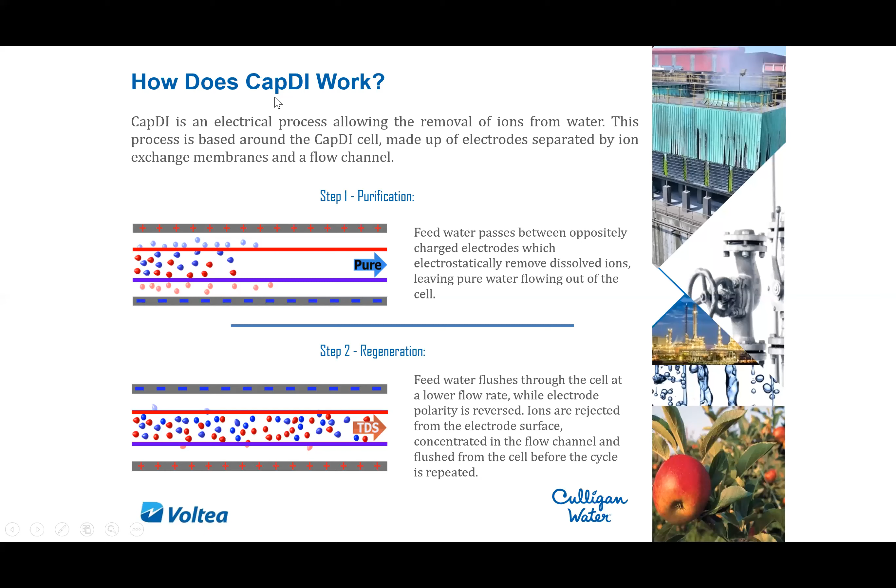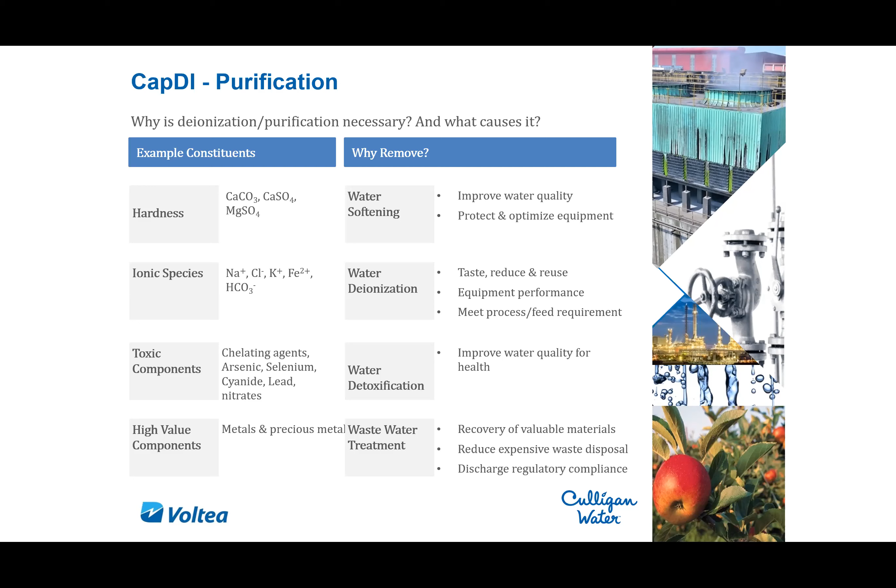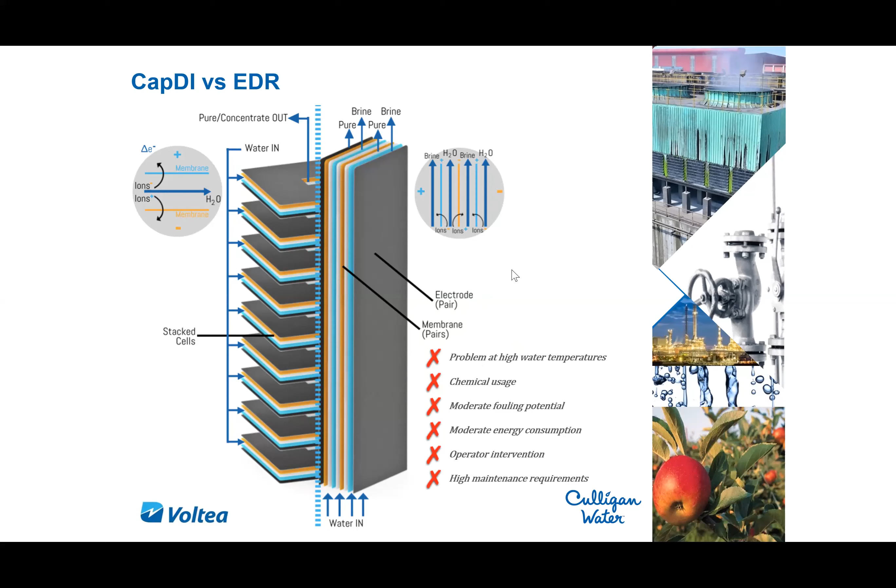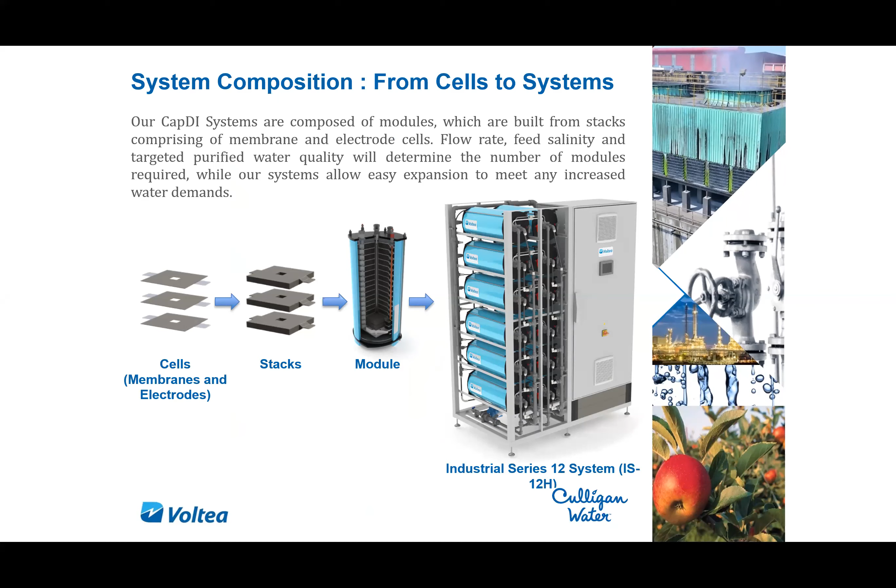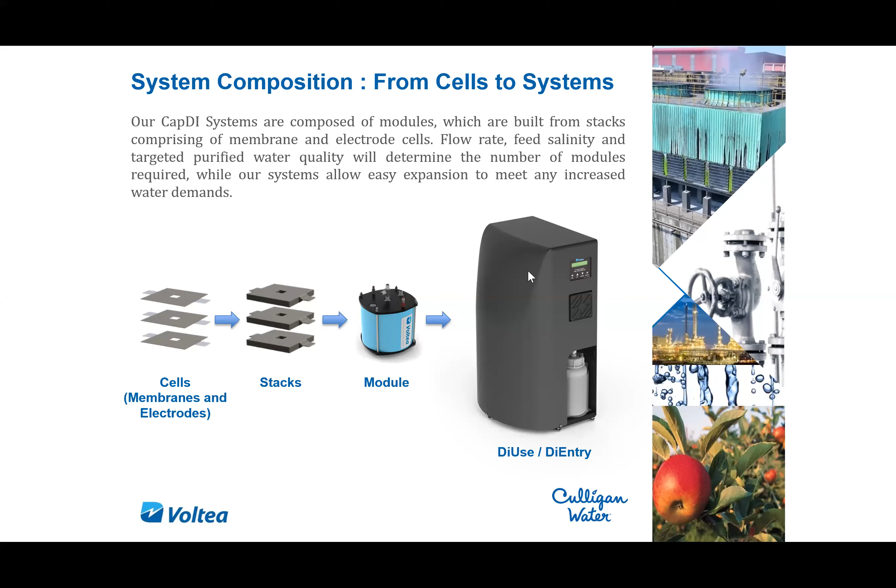This here is the smaller unit we're talking about, a DiUse or DiEntry. A simple module put into a system, controls here on the side take care of everything. This is the regenerant bottle used for the whole system. It's basically citric acid. In a commercial application, you might use a stronger acid, but it does everything automatically and takes care of itself. All you've got to do is look at the bottle and make sure it's not empty.

Voltea has over 100 global patents pertaining to their technology, how it's implemented into modules and membranes. It's a very high quality use of ion selective membranes that they actually manufacture under their own patents.

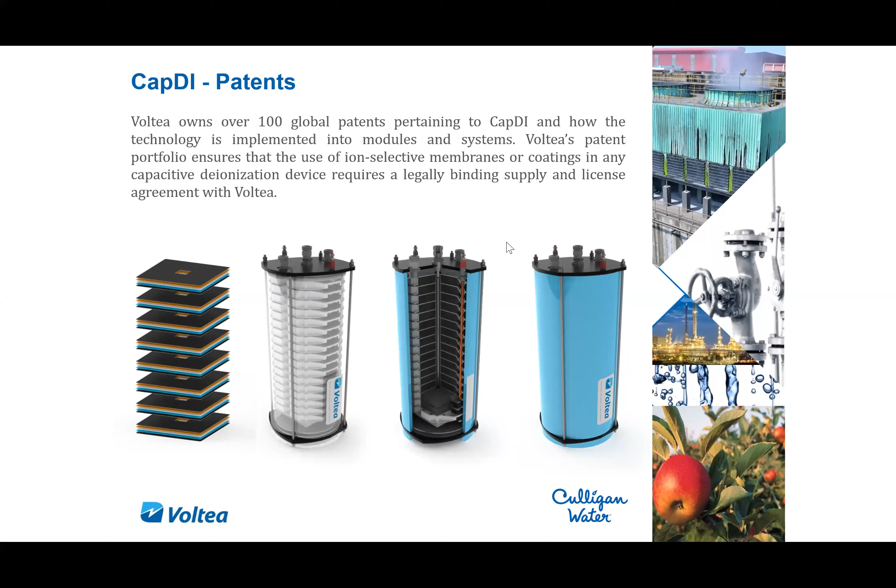Here's some of the industrial product lines, anywhere from a simple 2 system to a 6, up to even 40, but they're totally modular to fit the needs you have, and they can be built to tie together modularly to hundreds and hundreds of gallons per minute, even into containers you'll see later.

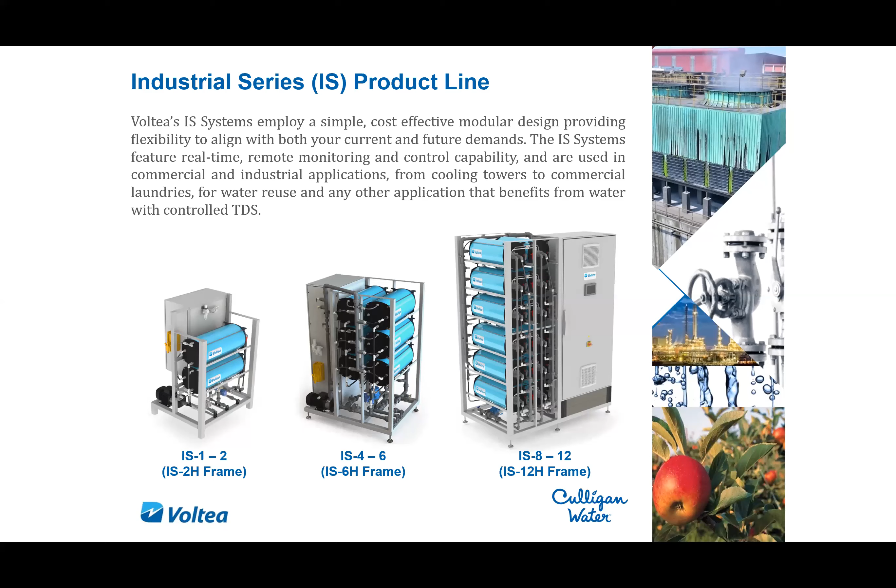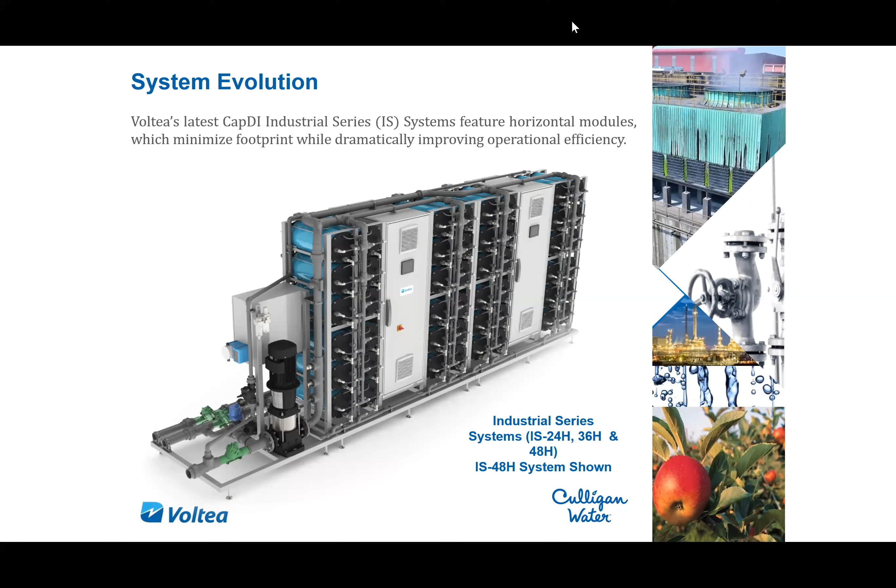Here's a large unit, similar to the one we're putting in the beverage factory. It'll do almost 50 gallons per minute, automated controls, simple racks. The racks are easily interchangeable and the cells are very easy to change - 2 bolts, a couple minutes and you've changed a cell when needed. That need is in the 5 to 7 year range, lasting as long as ion exchange resin usually does in a water softener.

Voltea has come up with exploratory development kits - basic smaller units that can be taken out for a pilot test for applications where you don't know if it'll work, and you don't want to be the first guy to jump on the bandwagon and be embarrassed if it doesn't. We have the capability of coming out to test the theory first, so you can see the results yourself before you buy a system. In most cases there's a modest charge for setup, delivery and trial, but if the purchase is made, all of that is returned towards the purchase price.

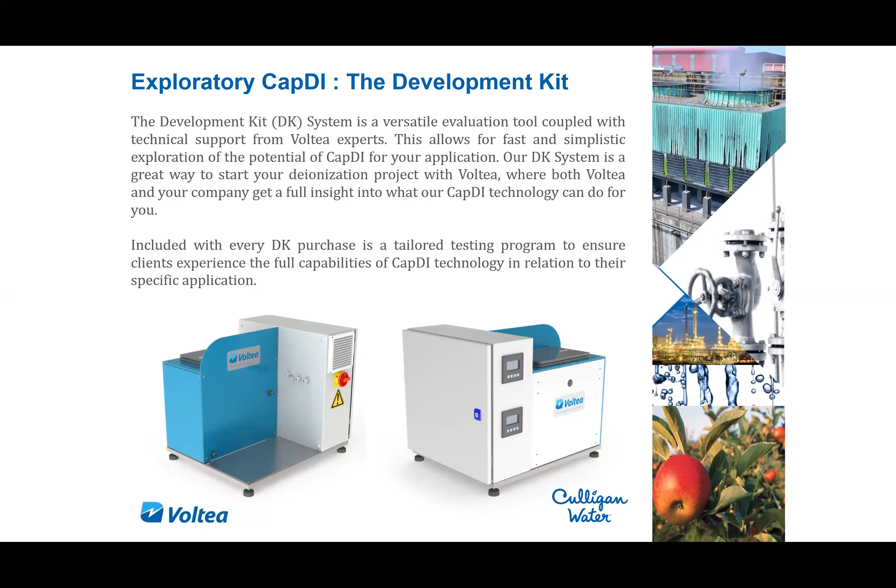As I was saying, the unit has dynamic control that can be controlled remotely, on site, or by an operator on hand. The unit is monitored live if chosen, not anything you're waiting for somebody to go read your numbers - you can read it live. You can see the quality of water coming in, the quality of water coming out, and the volume.

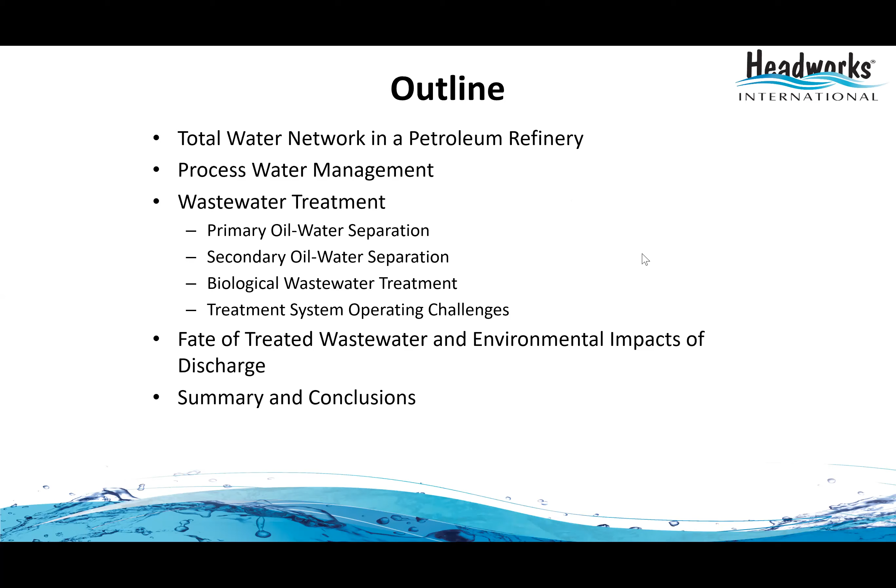First, let's talk about stormwater. Stormwater from non-process areas is not contaminated, so it can be directly discharged into the receiving body of water. Stormwater from process areas can be contaminated by hydrocarbons, so it is first discharged and collected into a detention basin, and depending upon the concentration of pollutants, if any...

Hi, Alan. Hello there. Hello. Interesting, not quite sure what happened though. Let's try again.

Okay, so depending upon the presence of contaminants, water will either be discharged or sent to the effluent treatment plant, ETP. River or seawater—in certain refineries they use seawater for cooling and condensing—and if those coolers and condensers are in process areas, there is a possibility of tube leakage and contamination by hydrocarbons. Again, depending upon the presence and concentration of contaminants, they are either sent to the ETP or discharged if determined to be clean enough.

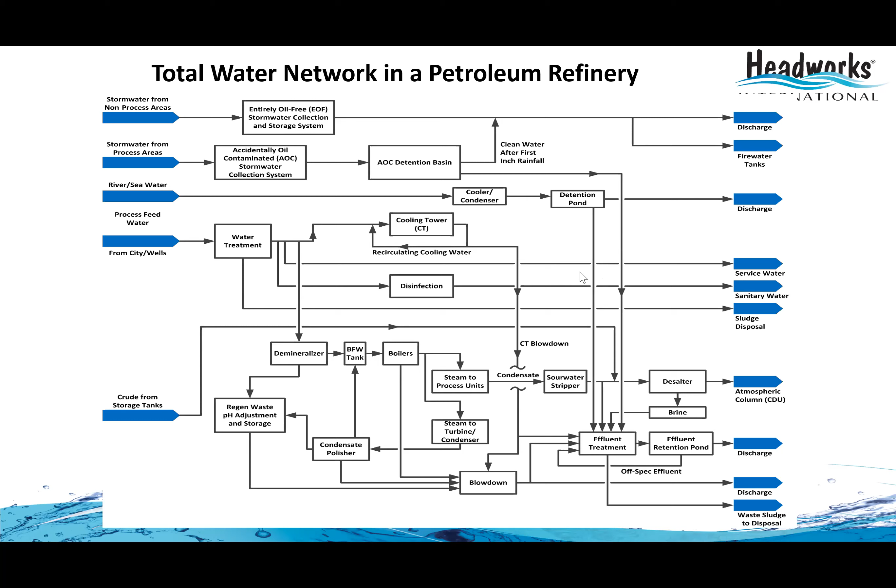Okay, so wastewater treatment, the general scheme is that, like I mentioned before, all the blowdown streams, contaminated process runoff, contaminated process waste, spent caustic, stripped sour water, desalter brine, everything is collected together and they're all laid into the treatment process.

And you can see at the bottom, this is the treatment line. Here the process starts with API separator, where the bulk of oil and solids are removed. Then it goes to an equalization tank. The purpose of the equalization tank is to absorb the shocks due to sudden surge of flow or contaminants into the wastewater stream. After that, it goes to a dissolved nitrogen flotation unit for fine removal of primarily oil and any solids.

And then it is ready for biological treatment. It goes to the biological reactors. Then after biological treatment, it goes to a storage tank, and finally through the effluent filters, it is discharged and the sludge is disposed separately.

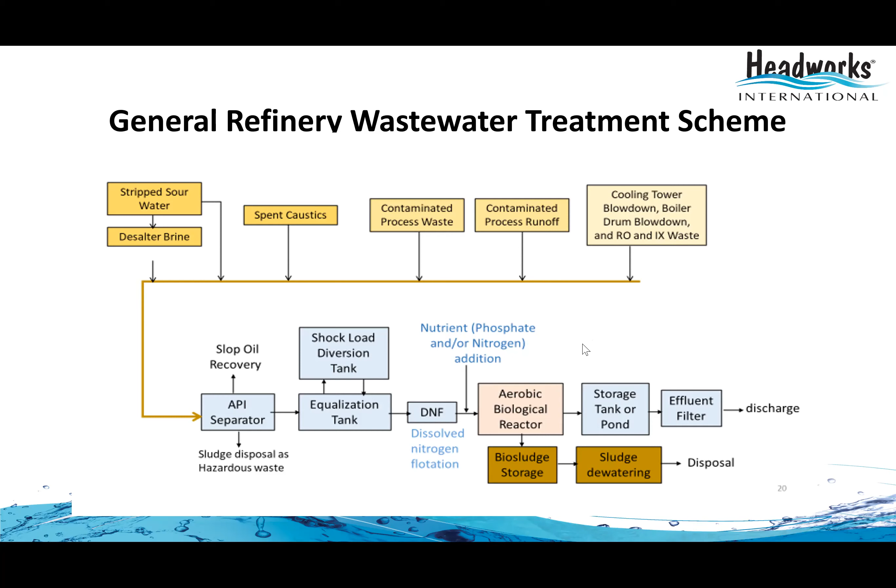Okay, primary treatment has two steps. Primary oil water separation by API separators. And here, the bulk separation takes place here. This is the very first unit operation in a wastewater treatment train refineries.

So typical effluent oil concentration is anywhere 50 to 150 ppm, whereas influent can be anywhere 1,000 or even more. And here, mainly the free phase oil is separated. Oil can exist in refinery wastewater in three forms: free phase, which can float easily; emulsified, which is difficult to separate; and dissolved phase. So mainly free phase oil is separated in API separators, and their operation and design is guided by API standard.

These days, these separators have to be covered to avoid air emissions of hydrocarbons, and because there is enclosed space, it has to be purged with an inert gas, typically nitrogen, to avoid any explosive situation.

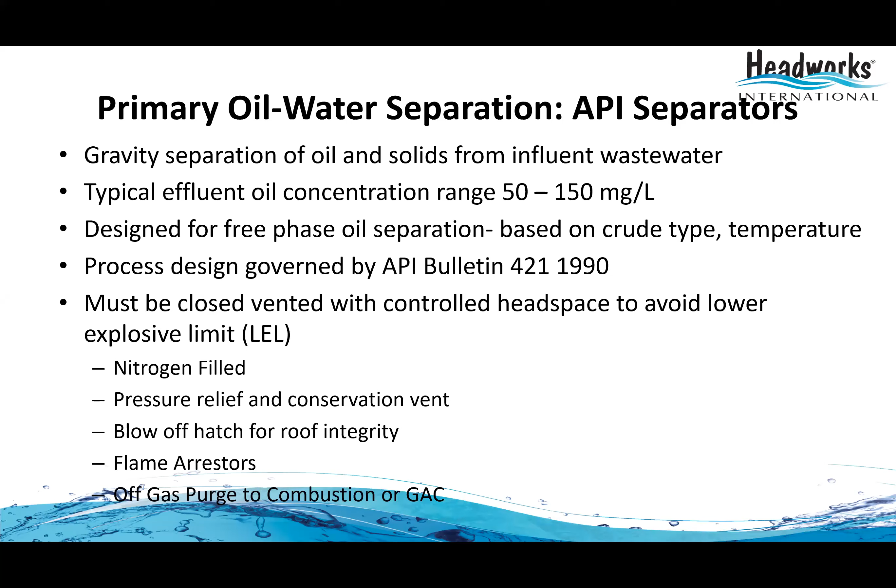Okay, we are not showing the equalization tank. That's just a vertical tank in most cases, allowing about a day of retention time. But the secondary oil water separation is by flotation, and there can be two types of flotation: induced gas flotation and dissolved nitrogen flotation. Here, dissolved nitrogen flotation takes place.

In both cases, the majority of oil that is separated is emulsified oil, which is very difficult to separate just by gravity. So here, the separation is assisted by bubbles of gas. In this case, the gas is nitrogen, and nitrogen is pressurized by water, high pressure water, and nitrogen and high pressure form a solution, and that high pressure is released at the inlet of the DNF. As the pressure is released, the gas bubbles come out in very tiny micro bubbles.

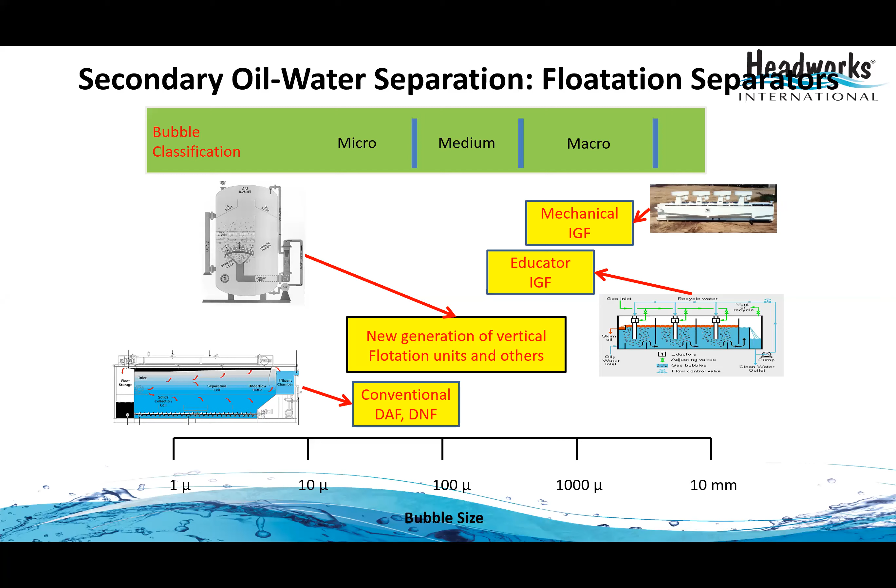Now we move on to biological treatment. The basic principle is that most contaminants are organic materials originating from oil. So organic pollutants plus oxygen plus nitrogen and phosphorus are needed because they support the growth of biomass—these are nutrients—along with some micronutrients like metals and other elements. These react together, and the oxidation reaction is catalyzed by enzymes secreted from the bacteria. As a result, the oxidation reaction produces carbon dioxide and water. Part of the organic matter forms new cells through reproduction, so there is net growth of cells plus microbial byproducts, and energy is produced. This energy is needed for the bacteria to move, for metabolic purposes, respiration, and reproduction, supplied by the oxidation of organics.

You can compare that to how we humans assimilate food. When we metabolize food, we also develop energy, we respire, and produce CO2 and H2O. In our case, new cells are deposited in our body. So it's very similar, particularly for aerobic biochemical reactions. Some cells die, so there is some decay, and that decay comes out as sludge.

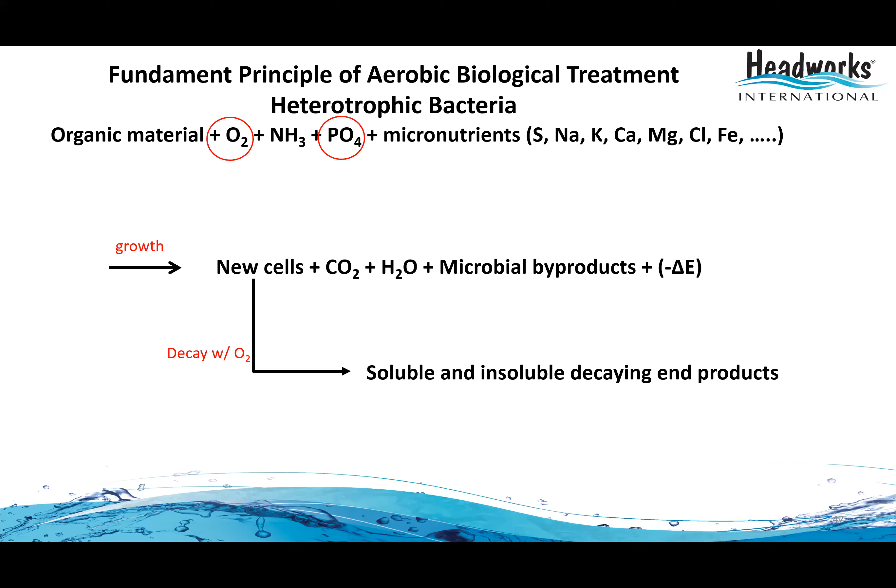I'll quote Dr. Van Loosdrecht of Technical University of Delft, considered one of the gurus in this field. According to him, for BOD removal—BOD being the organic matter associated with oil or organics—it is the stoichiometry that controls the reaction. In case of nitrification, which I haven't delved into much, there are locations where regulators require removal of ammonia by nitrification, oxidizing ammonia to nitrate ions. For those, it is the kinetics that controls, requiring a long retention time in the bioreactors.

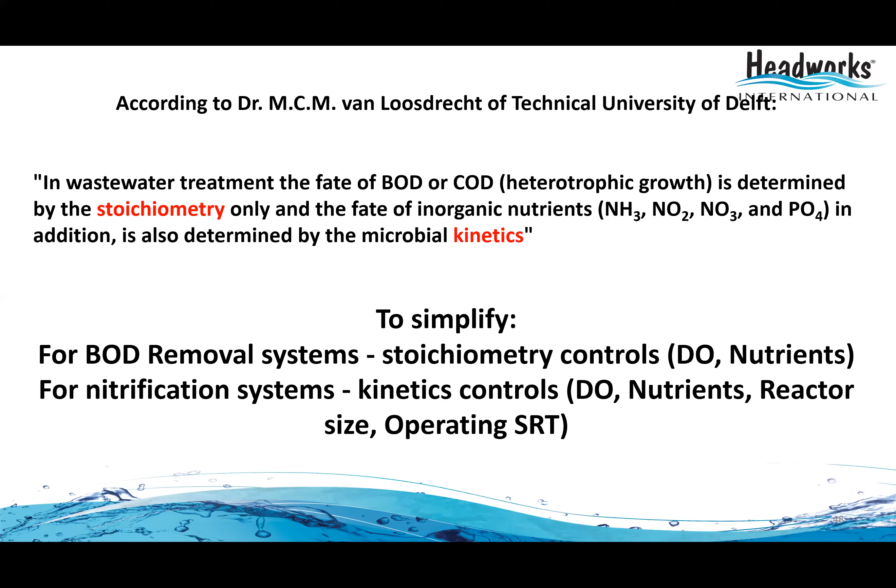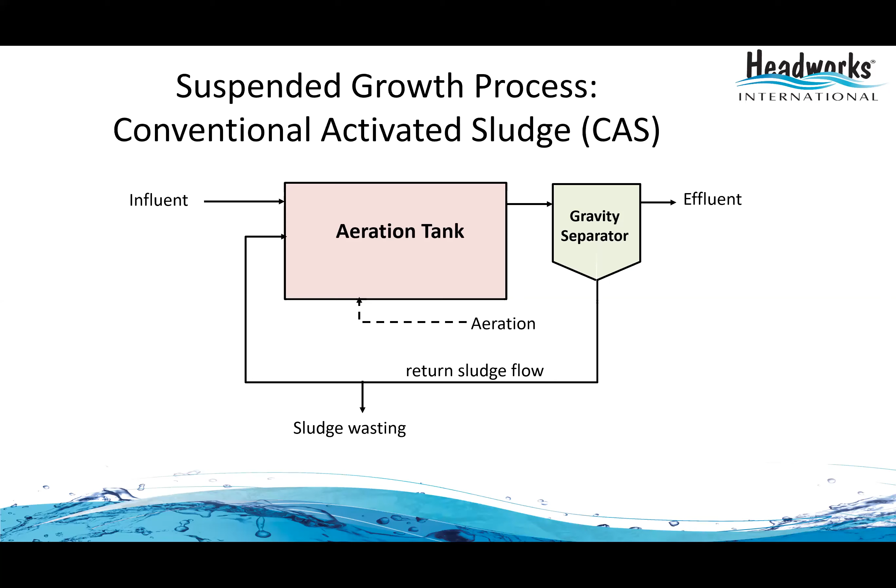This is a broad overview of the conventional activated sludge process. The influent comes in to the aeration tank, which is the bioreactor where air is supplied to provide oxygen. Air is necessary to keep the whole tank well mixed, uniformly mixed, and to supply oxygen for respiration and metabolic processes of the bacteria. What comes out is a solid-liquid suspension; the biomass separates by gravity, settles at the bottom, and clarified water comes out as effluent. Part of the solids is wasted because solids grow in number due to growth in biomass—there is reproduction in the system—so net growth is wasted to keep the biomass concentration in the aeration tank fixed for steady state operation. The remaining solids are sent back as seed for the incoming influent organic matter to be oxidized.

That was the traditional process. There have been new innovations in the past 2 to 3 decades, no longer truly new since there's widespread application of these processes now. What are the drivers for new processes? First, increasing need to recycle and reuse treated wastewater globally, since water is a precious and dwindling resource. Second, the need to treat increasing volumes of wastewater resulting from increased throughput of crude in refineries. Third, tighter regulations requiring nutrient control—just BOD removal isn't enough; you also have to remove nitrogen and phosphorus that may come with refinery wastewater. I'm listing three processes: membrane bioreactors, moving bed bioreactors, and integrated fixed film activated sludge reactors.

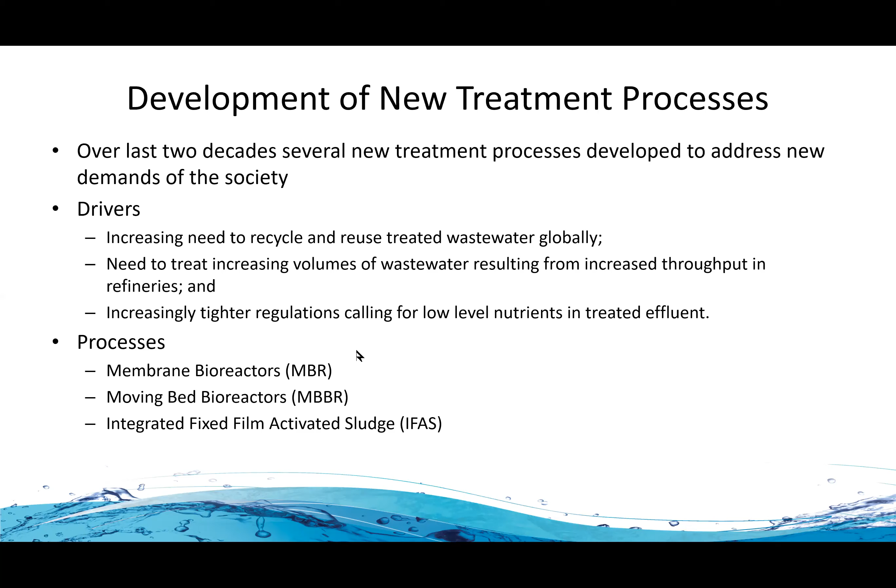And with the price of land and real estate, many refineries and utilities don't have any space to expand and accommodate higher capacity. So in that case, this is a very good option.

And the best advantage is that the solid liquid slurry that comes out is separated by an ultrafiltration membrane. It's not gravity separation. So the quality of effluent is very high, the BOD and TSS is less than 2, and that can be directly used for cooling tower, or it can be sent to an RO unit for boiler feed water. And then the net growth is wasted, and the rest of the sludge is returned as return activated sludge to the bioreactor.

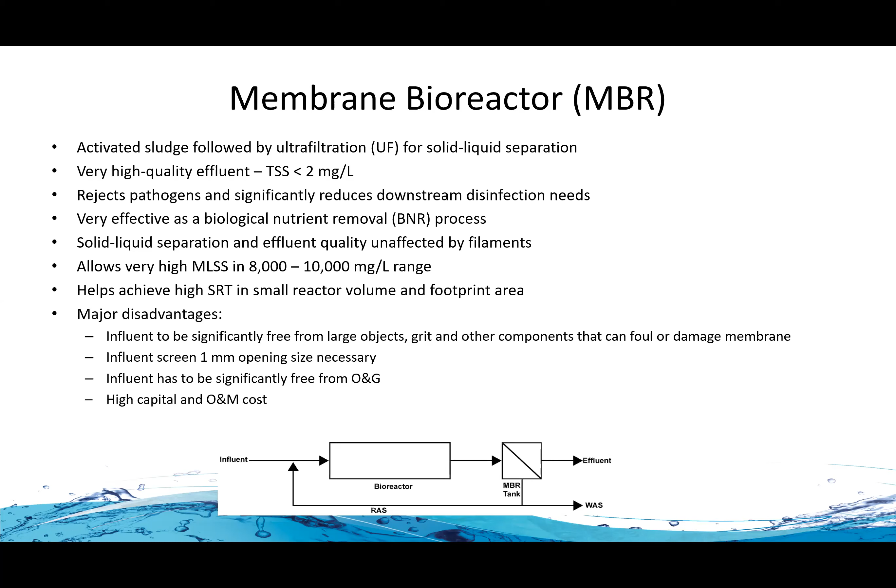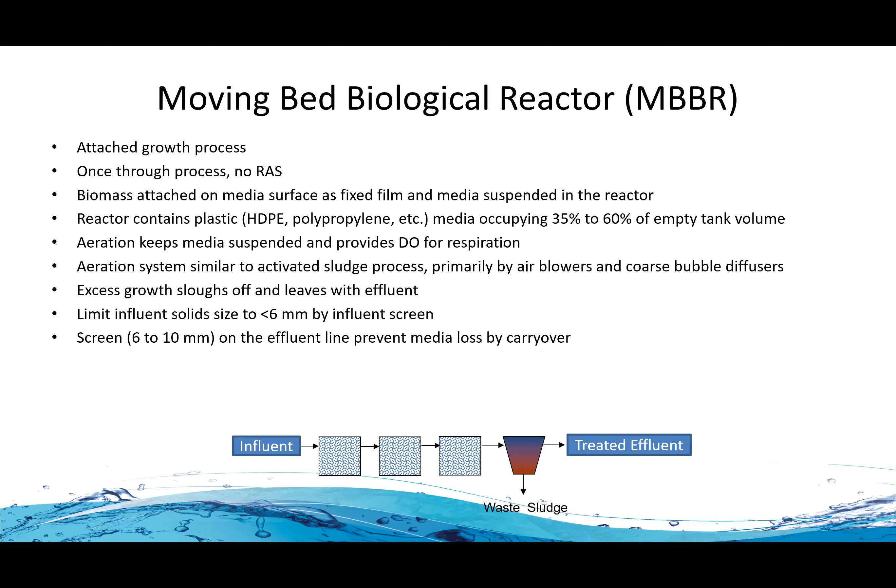And it's almost a hands-free process because there is no recycle. So whatever sludge is produced is wasted. It requires minimal oversight by operating personnel. It can even be operated remotely. So those are the main advantages. Can we move on, please?

Disadvantage is the settling property is not as good as activated sludge process. So you have to use a DAF for solid liquid separation rather than a gravity separator. Next slide, please.

Okay, here IFAS, integrated fixed film activated sludge process. Here, the main difference with MBBR is that the sludge is returned. So this can use a gravity clarifier, the sludge is returned, and this is a hybrid, meaning because the sludge is returned, there is attached growth as well as suspended growth. As a result of that, this takes advantage of both the suspended growth process and attached growth process.

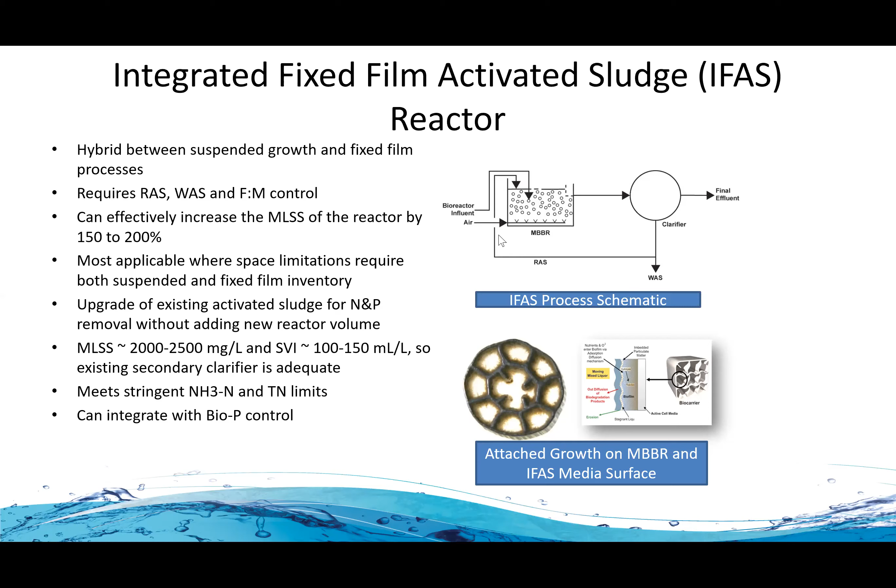So now I am going to get into some operating challenges. There are a couple of slides on that. So in two areas, there can be operating challenges: in the primary treatment area, where oil and solids removal systems include API separators and DGF, DNF.

Now, these days, they all have to be covered, and that makes it very difficult for operation and maintenance. You cannot see from outside unless you open some hatch or something. And also there is a lot of solids, particularly in the API separators. They collect a lot of solids at the bottom, to the extent that the bottom sludge scraper sometimes gets jammed and the motors burn out. That's not very uncommon. That is one of the operating challenges.

And then also sludge accumulation in equalization tanks reduces the active volume and the retention time. So the equalization function is compromised there due to solids accumulation. All of these can affect the biological treatment, because the better the oil separation and solid separation is in the front end, the easier it is for the biological treatment to function smoothly.

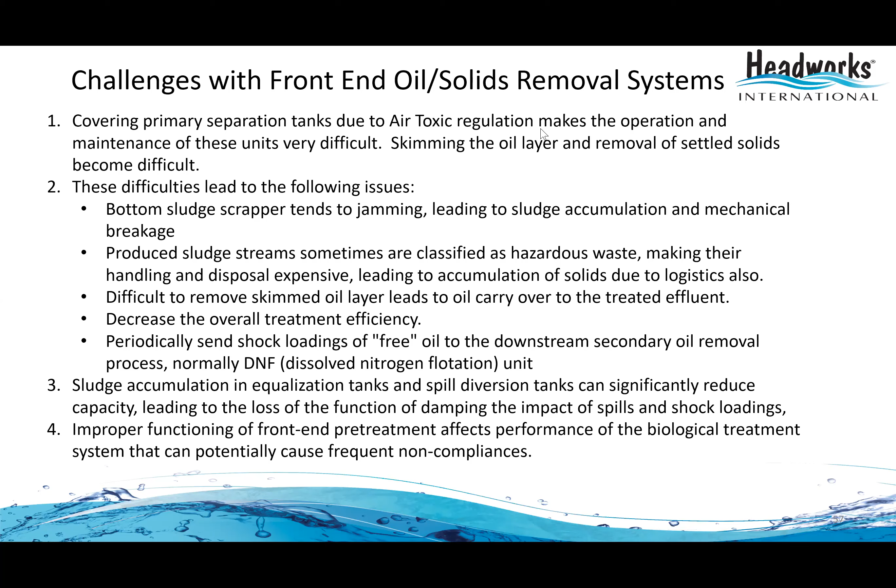Okay, with the biological treatment, if there is spillage due to excessive carryover of oil and grease, as I mentioned, the performance fails, and also it leads to foaming. In extreme cases, foaming can lead to spillover from the reactor tanks. So that is something that needs to be arrested in the primary treatment. The oil separation and removal should be very efficient.

Then these days, because of the increased use of oil from the hydrofracturing operations, those oils typically contain high H2S, and to restrict the emissions of H2S, the producers add a lot of amines, and those amines show up with the crude, and they upset the biological treatment, because amines contain a lot of nitrogenous compounds, and they demand a lot of dissolved oxygen, whereas the design may not have that much oxygen capacity. So the biological treatment fails at some point. That is something that needs to be taken care of.

Another thing is the dissolved oxygen can be maldistributed in sludge, flocks, and films. So that's a diffusion limitation.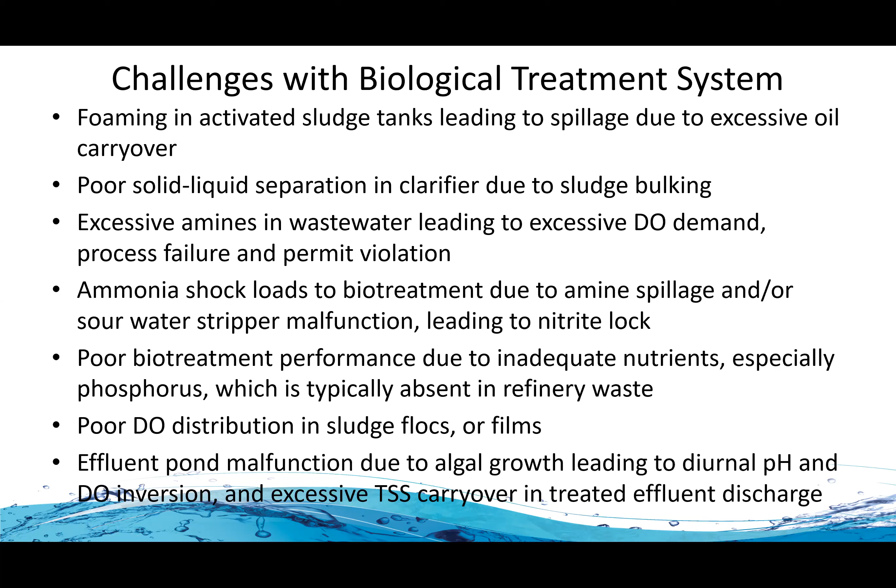In many cases, the effluent is collected in a pond, and these ponds are very much prone to algal growth, and algal growth can cause diurnal changes in dissolved oxygen and carbon dioxide. So there can be diurnal changes in pH and dissolved oxygen, which can also lead to excessive carryover in treated effluent with the discharge.

So the agenda is going to be introduction, desalination, seawater reverse osmosis, energy consumption, renewable energy, and conclusions.

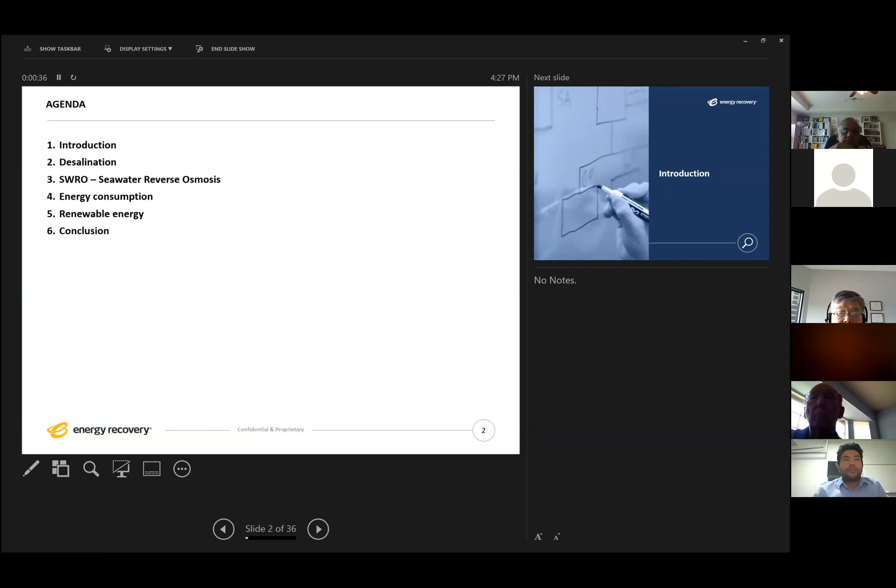So why do we need desalination or seawater desalination? This is an overall water risk map from 2020. You can see that anything with soft yellow is an area with plenty water, and anything dark red needs more water sources. As you can see in the specific case of Texas, you have a bunch of red spots as Texas needs more water. Mexico, Peru, Chile, all Africa, Middle East, South Asia, Australia, more or less, we need more sources of water. Seawater desalination is an option to increase water availability, increase other sources of water.

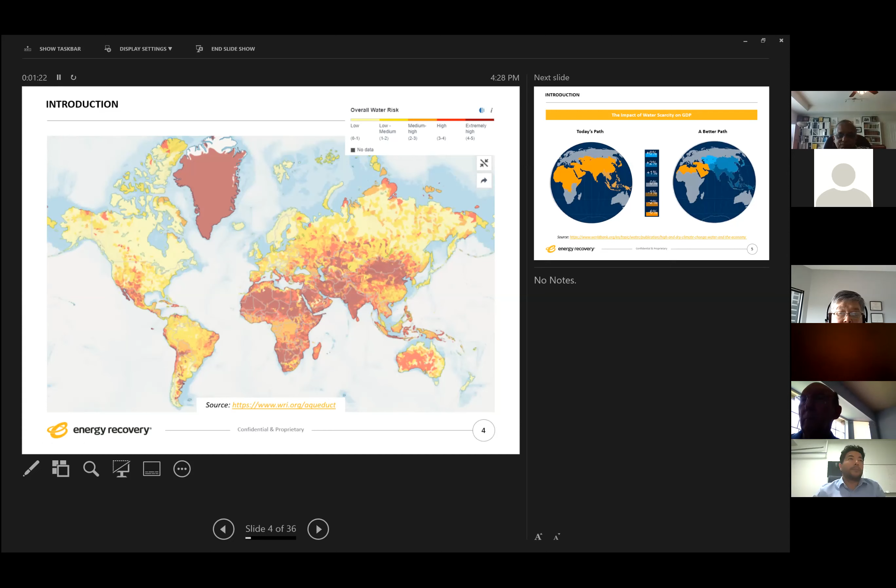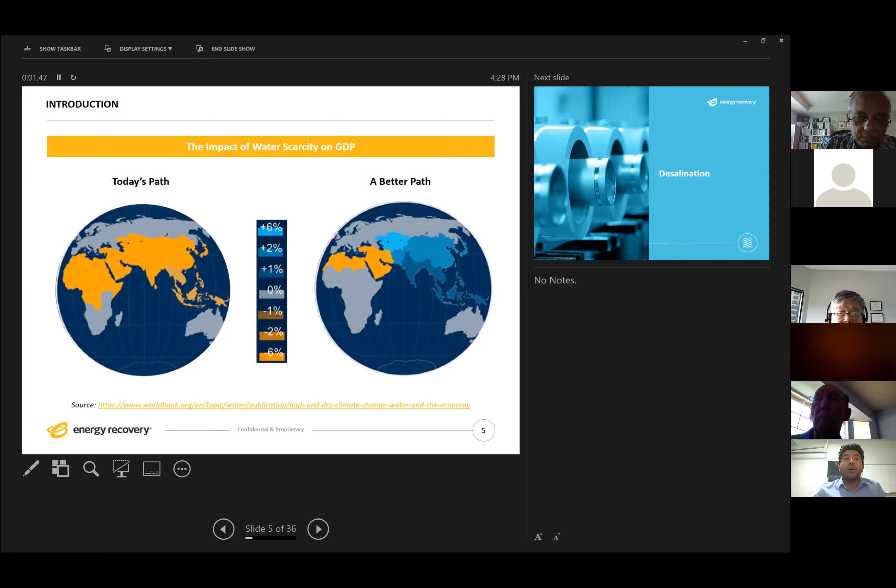It's not only about water quantity, it's also about quality of water. Per the World Bank, if you have a low amount of water, that potentially can lower your GDP by 6%. However, if you have plenty water, that will help you increase your GDP plus 6%. So water is not just about what we drink or use in the house, it's also about how it's going to affect the economy of the country.

So now let's get into the topic of desalination. Desalination is a process to remove salt from water. You can remove salt from brackish water, from a lake, from a river, from different sources. For this specific presentation, I'm going to be focusing on seawater. So let's start talking about desalination in seawater.

In 1970, we had the first technology called thermal technology, which is basically a multi-stage flash technology that evaporates and condensates the water to produce water without salt. In 1982, we start playing with membrane technologies. In 2002, we get several improvements in membrane technologies with better membranes, higher efficiency pumps, energy recovery devices, and other changes. By 2005, that will be one of the milestones where we connect desalination with renewable energies.

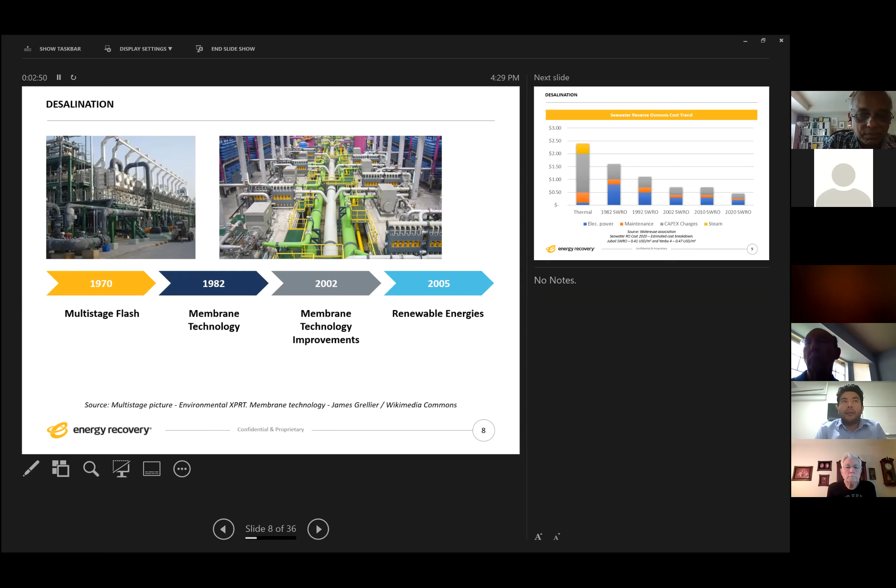But let's talk about the cost. What is the cost of the water? The first line, the thermal one, is numbered from 1970. You can see that on average, for every cubic meter of water, the cost was $2.4. Then in 1982, we started using membrane technology, so the price of water went down from 2.4 to 1.6. Something really important: if you break these costs down between electric power, maintenance, CapEx charge, and steam, you can see when we move to membrane technology, electric power becomes one of the biggest costs of the water.

Then in 1992, we keep going down from 1.6 to 1.1. In 2002, we start using high efficiency energy recovery devices and high efficiency pumps, and we drop it from 1.1 to 0.7. Finally, in 2020, we have been able to achieve prices of $0.41 per cubic meter and $0.47 per cubic meter. So you can see that with time, technology is getting better, prices are getting better, and the cost of desalinated water is getting better.

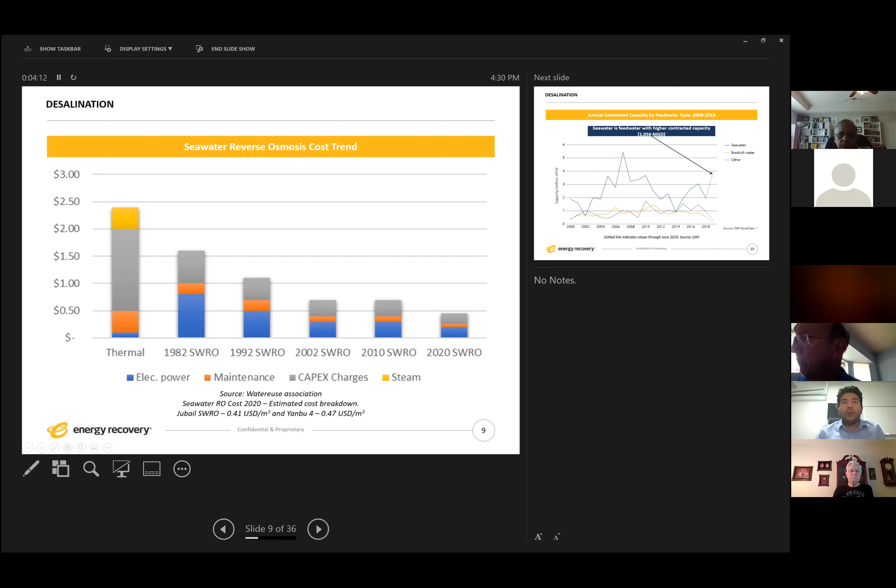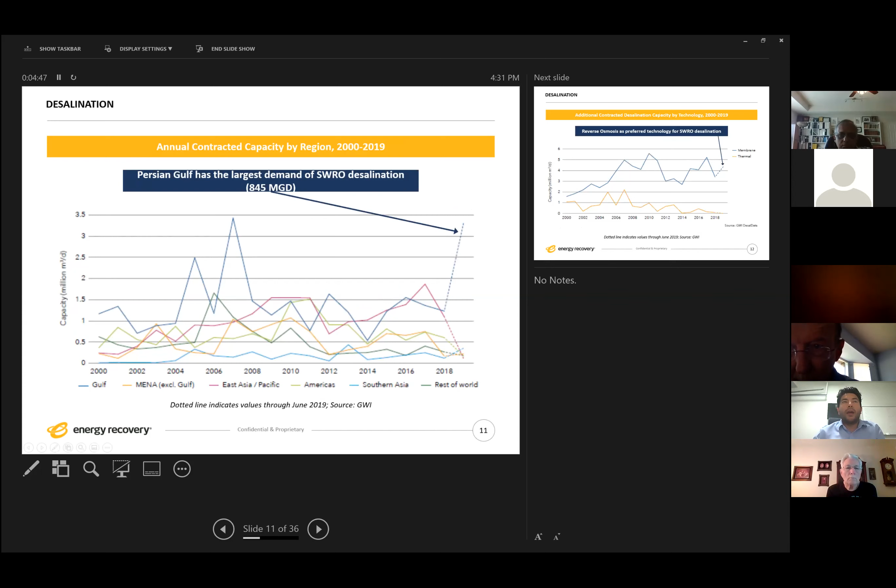So how much is the desalination market growing? You can see per this table from GWI, in June of 2019, there were 1,056 MGD of seawater desalination plants installed in the world, only in this year, by June. So we're waiting for more plants by end of 2019. If you look at this graph showing the territories - Gulf, MENA, East Asia, Americas - the Persian Gulf is the territory with higher demand for seawater RO process.

Finally, between the two technologies, membrane and thermal, you can see that membrane technology, due to the lower cost to produce water, has been the preferred technology in the industry over the last 10 years.

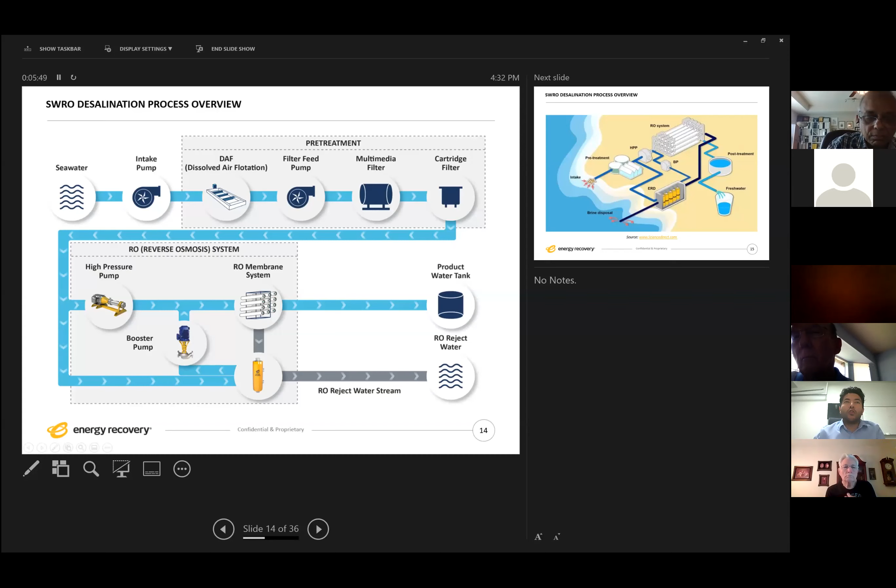So now let's talk a little more about what a seawater reverse osmosis plant is. A seawater reverse osmosis plant follows this path: you have seawater, then you get the intake pump, then you have a pretreatment. The pretreatment is based on water quality. In this case, we have a DAF, filter feed pump, multimedia filter, and cartridge filters. Then the water complies with specific requirements and goes to a reverse osmosis system. This reverse osmosis system is what we're going to be focusing on in this presentation, basically the energy recovery devices. From the RO, we get product water tank, and then we get reject water. So let's see the following video that will explain in detail how that RO plant works.

This plant is located in Spain, Barcelona. The Llobregat desalination plant is located in the municipality of El Prat de Llobregat, next to the mouth of the river.

We're not seeing it, Miguel. Sorry? We're not seeing it, Miguel. Oh, you didn't see the video? No, you'll need to select it in the share screen when you're going to share screen and select it specifically. Okay, let me do that really quick, sorry.

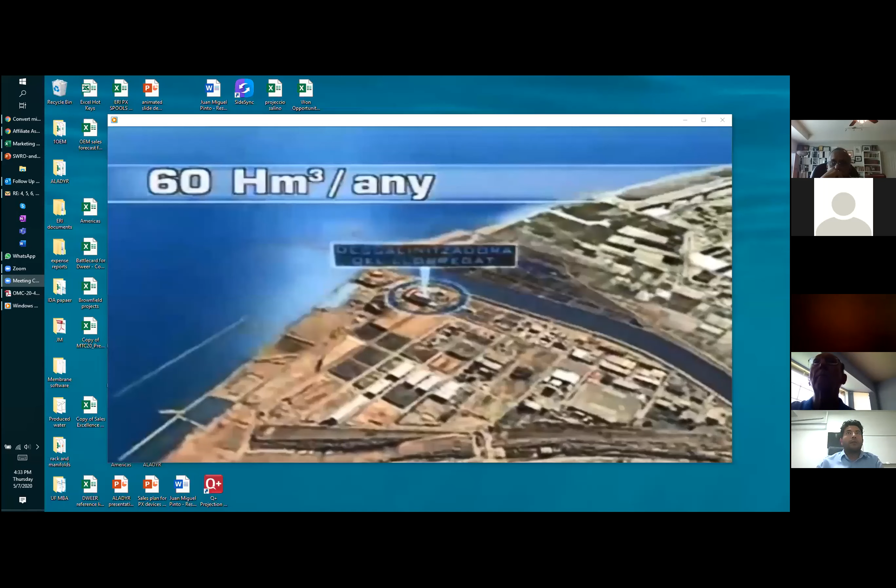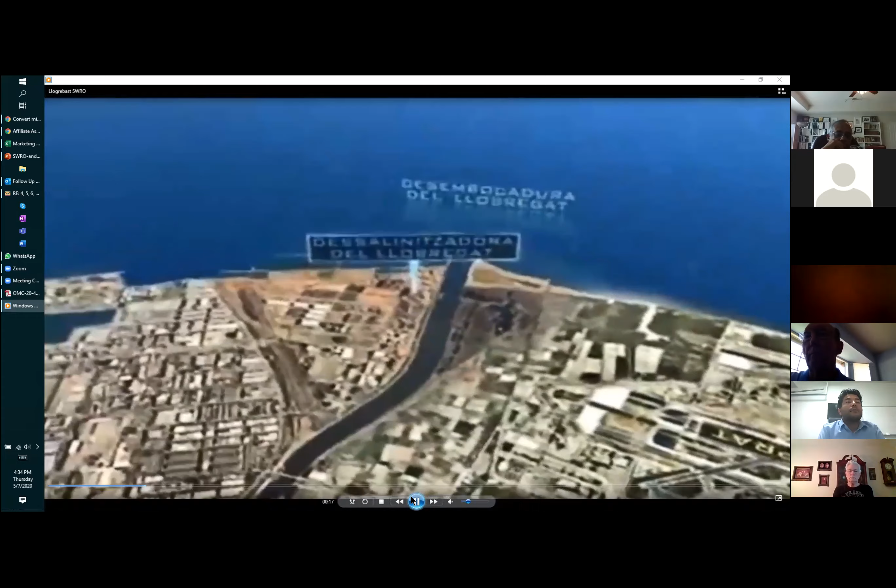As told you before, this plant is located in Spain, Barcelona. It's one of the largest seawater RO plants in Spain. The Llobregat desalination plant is located in the municipality of El Prat de Llobregat, next to the mouth of the river. It can produce 60 cubic hectometers a year, in other words, 200 million liters a day.

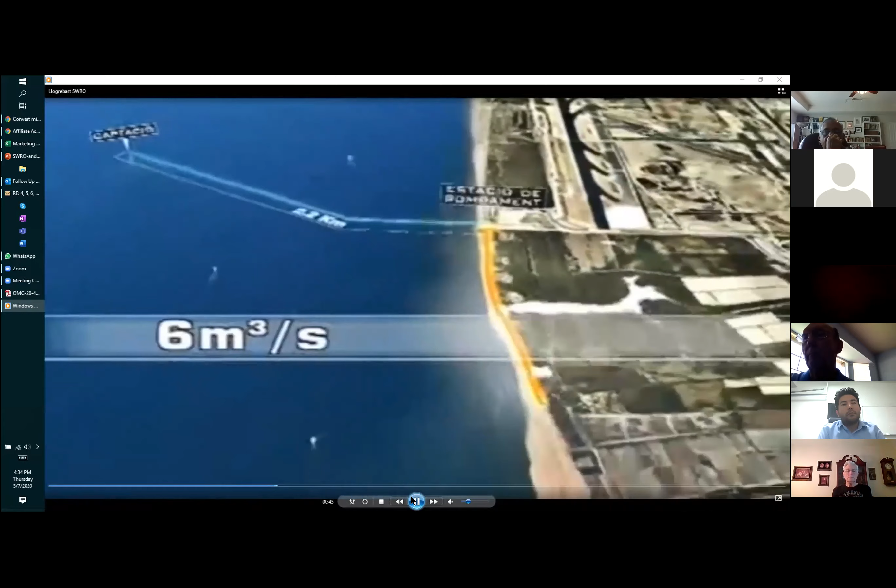The desalination process begins by collecting seawater through a 30-meter deep open intake tower and a 2.2-kilometer long underwater pipeline. A pumping station will send up to 6 cubic meters a second to the plant through a conduit that will cross the river Llobregat beneath its bed.

Here, the water will undergo a pre-treatment, consisting mainly of separating the solid matter through flotation, open filtration through sand, closed pressure filtration, and microfiltration.

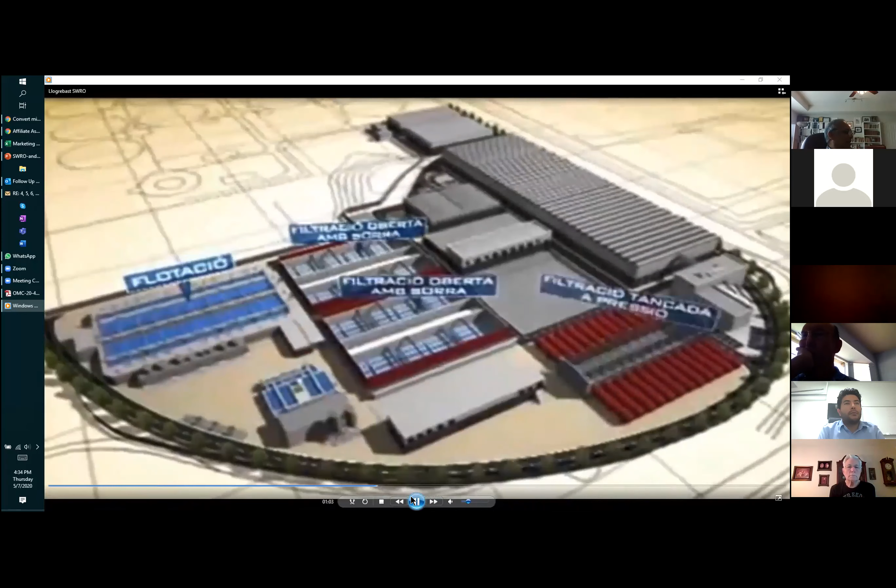The reverse osmosis process consists of passing this already filtered water through semi-permeable membranes that stop the mineral salts going through.

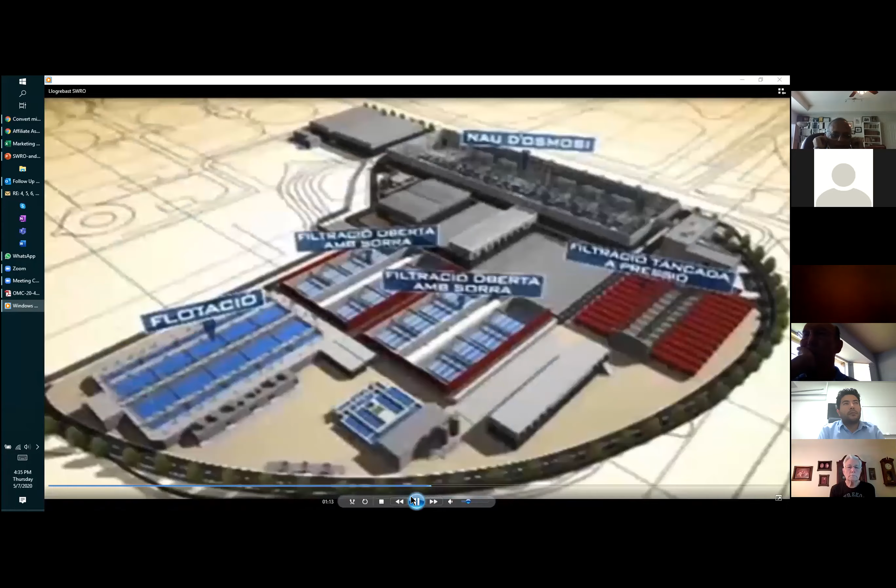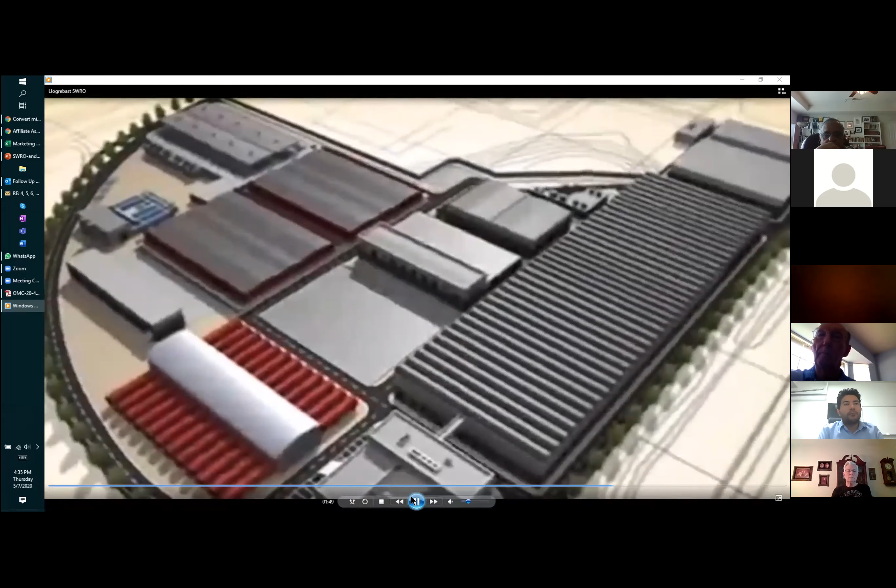High-pressure pumps are used to force the water through the membranes. 45 liters of fresh water can be obtained from every 100 liters of seawater subjected to osmosis. The remaining 55 liters of reject water have an excessive salt content. This reject water is still at high pressure, which is taken advantage of by using energy recoverers to reduce energy consumption by 50%.

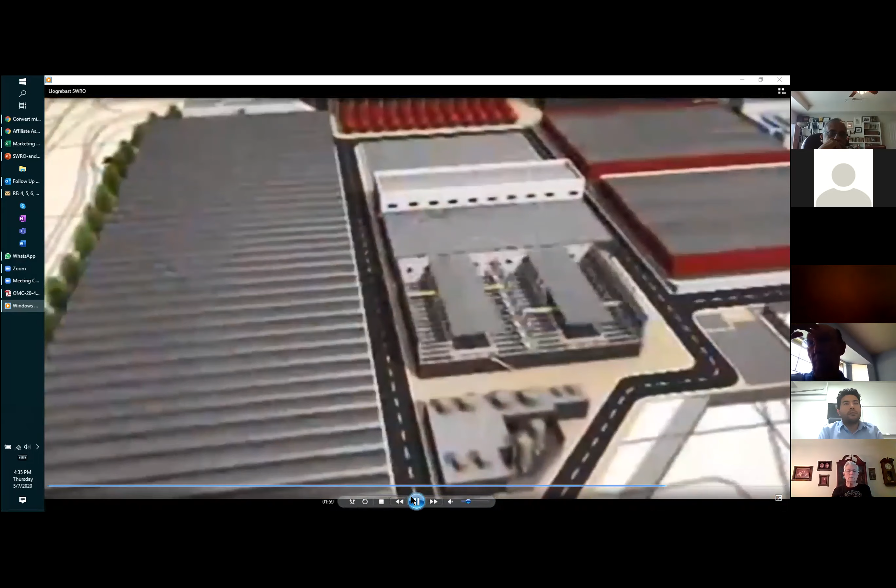The fresh water obtained from the osmosis process is remineralized to make it fit for human consumption. Finally, the water is chlorinated to guarantee its disinfection and then pumped through an 11.5-kilometer long pipeline to the Font Santa reservoirs in Sant Joan Despí.

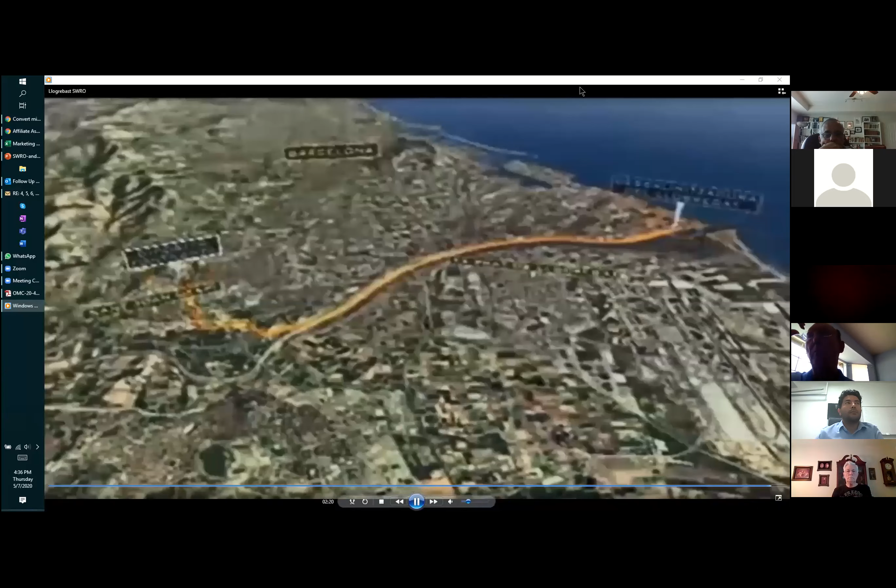Let me go back with the presentation. Very good.

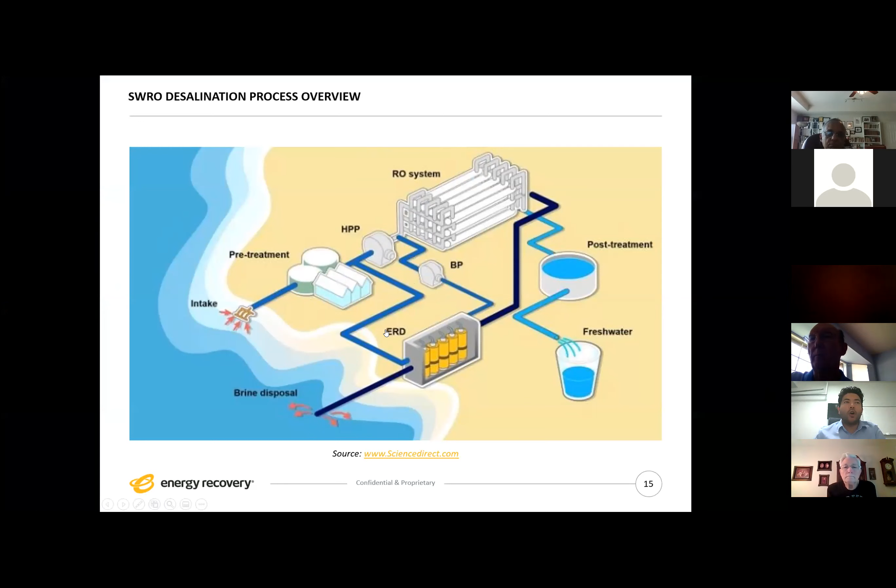So as you were able to see on the video, basically we have an intake system, pre-treatment, where we have the RO system, and then we have a post-treatment, freshwater and brine disposal. So this is the main body of a seawater RO plant. We're going to be focusing this presentation on the energy recovery device process.

And they started using, for the first time, energy recovery devices called the Francis turbine. The Francis turbine was able to keep reducing the energy consumption from 13 to more or less 7, 8 kilowatts per cubic meter. Then we got the Pelton turbine, another ERD with higher efficiency, and we kept reducing the energy consumption, getting close to maybe 4 kilowatts per cubic meter.

And finally we have the isobaric device, which is the one that my company makes, that gets the highest efficiency. We were able to drop it maybe close to 2 to 3 kilowatts per cubic meter.

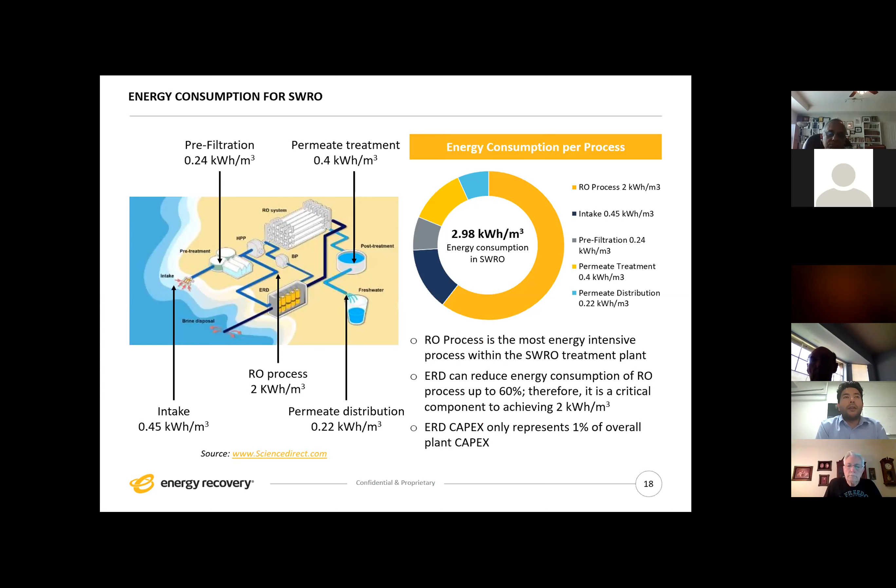So for this system, it's a system where we don't have an energy recovery device. The high pressure pump is going to take all the feed water and boost it to 920 PSI. You get fresh water, but at the same time you get concentrate. This concentrate comes out at 900 PSI, 300 gallons per minute.

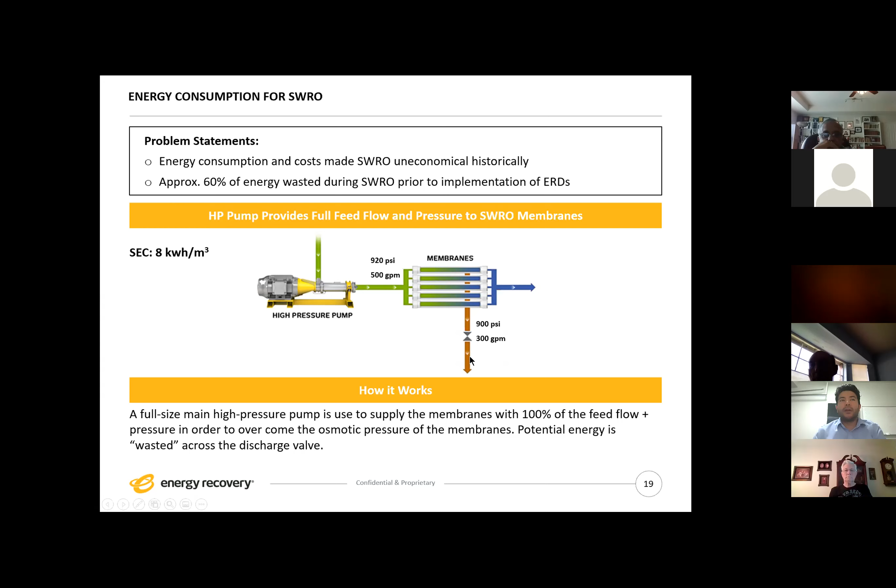What happened in this case, back in 1983, 1985, is we did not have any technology to use this pressure. So we used to have a valve, and the valve was dropping the energy from 900 PSI to 20 PSI, and then we sent the water back to the ocean.

So one of the first turbines was the Pelton wheel. The Pelton wheel was able to reduce the specific energy consumption by 4 kilowatt-hours per cubic meter. In this case, we're taking the energy of the concentrate, 900 PSI and 300 gallons per minute, and transferring it to the motor by a shaft.

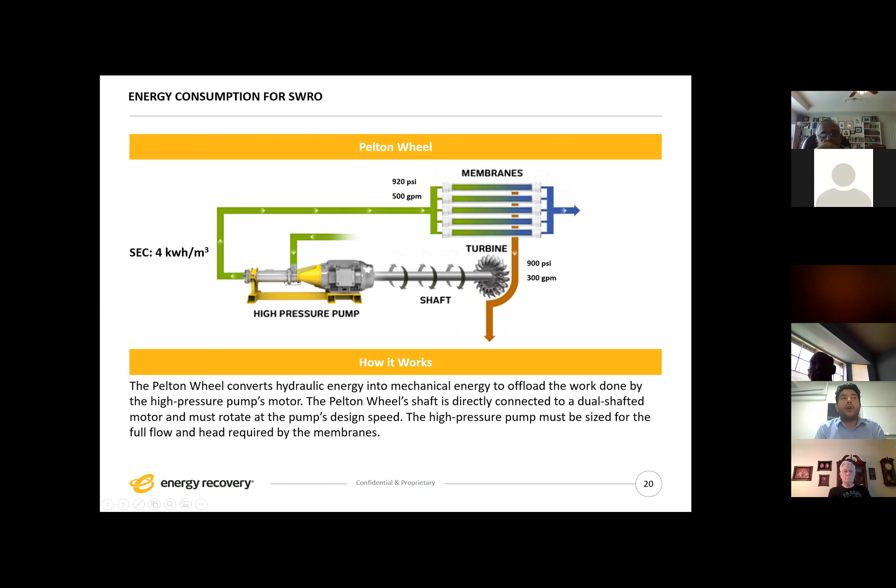The motor plus the turbine is going to boost the pressure of the feed water from 30 PSIs to 920 PSIs. So this kind of centrifugal device keeps improving with new technologies.

The next level of the Pelton turbine was the turbocharger, which we can call a booster pump without a motor. The turbocharger takes the energy of the concentrate, 900 PSIs, 300 gallons per minute, and transfers that energy to the feed water to increase its pressure. For this case, your high pressure pump goes from 30 PSIs to 595 PSIs, and then the turbocharger boosts it from 595 to 920 PSIs. So it's a booster pump for 325 PSIs. That at the end helps reduce the size of the motor and the high pressure pump. The specific energy consumption for this configuration is 3.6.

The next level is isobaric technology, or pressure exchanger. In this case, we have feed water of 500 gallons per minute at 30 PSIs coming in. We split it into two flows. Flow number 1 goes to the high pressure pump, 200 gallons per minute, equal to the fresh water flow rate. The 300 gallons per minute goes to the pressure exchanger, equal to the concentrate flow rate. The pressure exchanger has two inputs and two outputs. The first input is concentrate at 900 PSIs, 300 gallons per minute, and the second input is seawater at 300 gallons per minute at 30 PSIs.

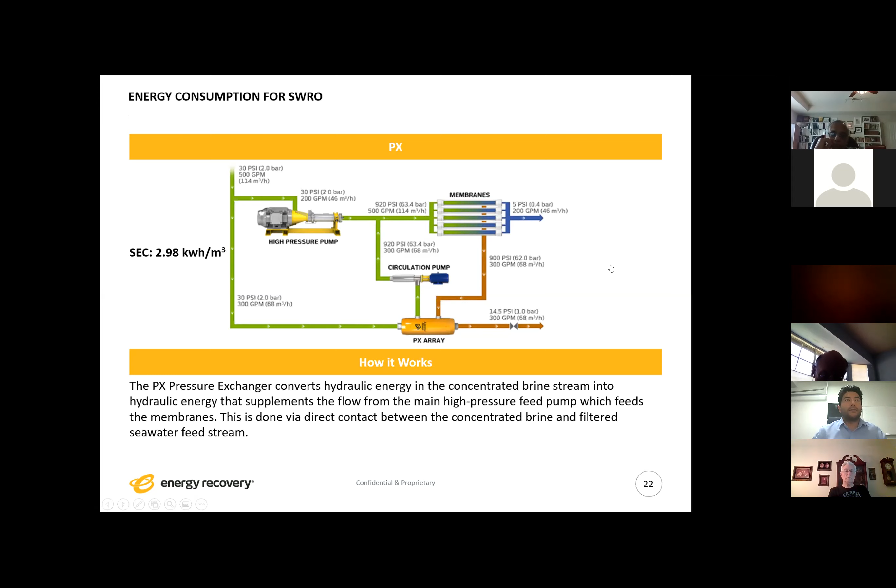Can you see the animation or not? Yes, you're good. Okay.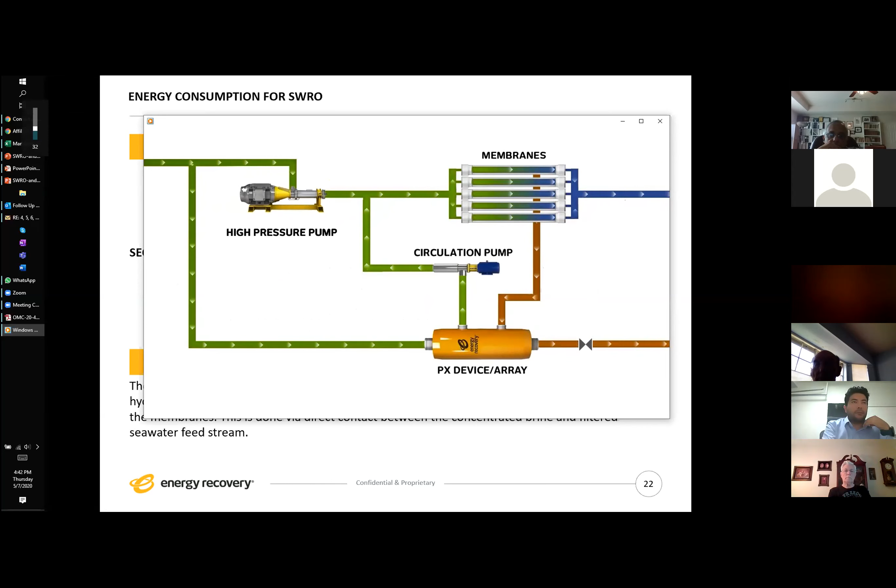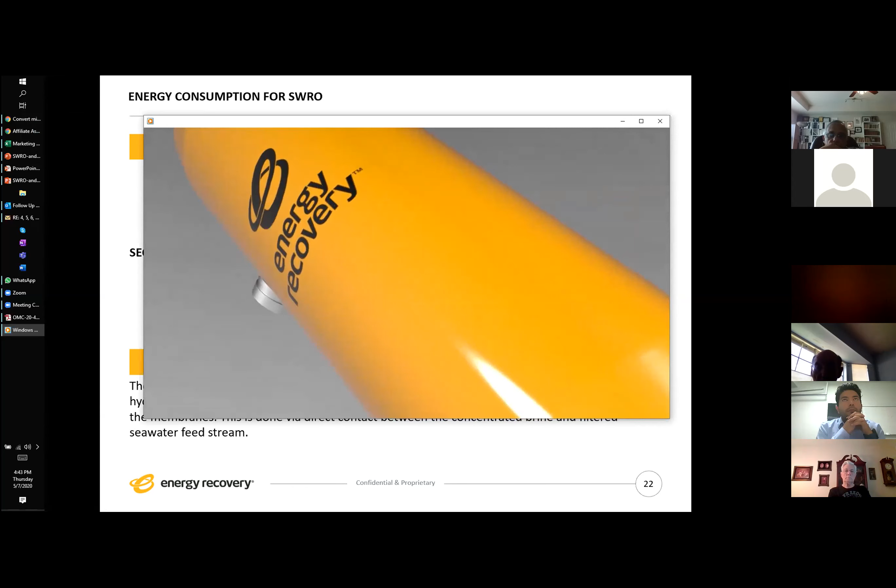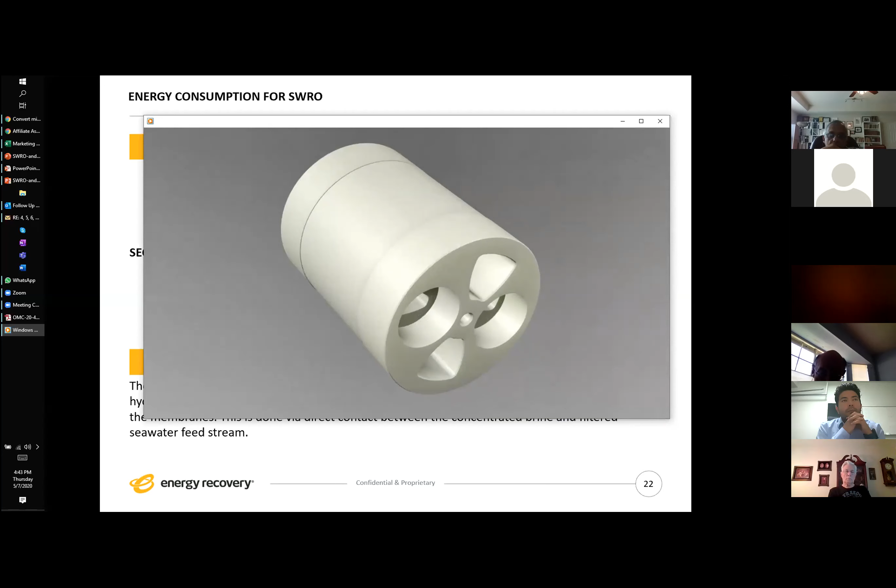The PX captures energy that would otherwise be wasted, reducing the desalination plant's high pressure pump flow requirements. Not only does this save electricity, it also cuts high pressure pump size requirements, producing further savings. Now let's explore the engineering behind this innovation. Simply yet elegantly designed, the PX rotor is the only moving part in the entire device. Surrounding the rotor are a sleeve and two end covers. These ceramic components fit snugly around the rotor to form a tight fluid seal. Water in the narrow gap around the rotor acts as a hydrodynamic bearing, requiring no external lubrication.

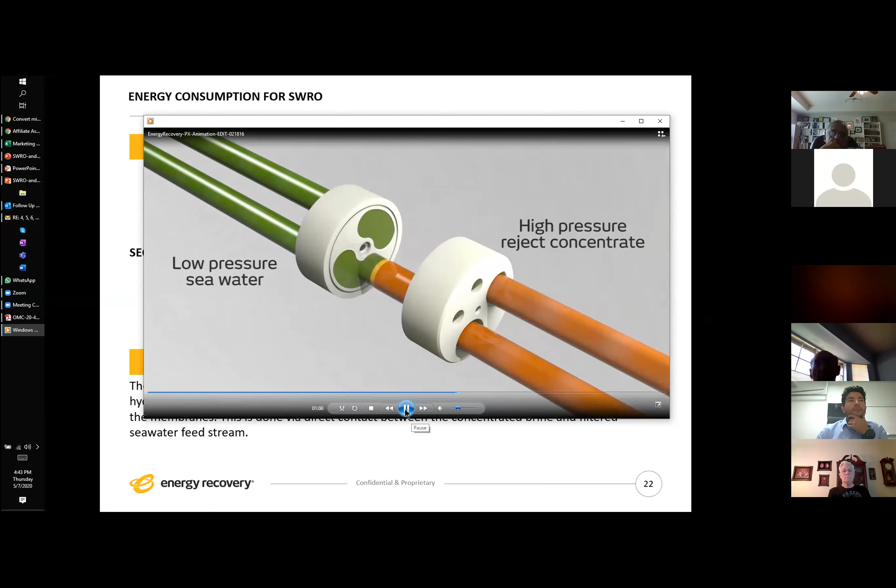High-pressure reject concentrate from a reverse osmosis plant's membranes flows into the PX. Low-pressure seawater simultaneously enters the PX and fills the rotor, where it is exposed briefly to the reject concentrate. Energy from the hydraulic pressure is then transferred directly from the concentrate to the seawater inside the rotor.

So the pressure exchanger is like a piston pump, but we don't have a piston. It's water with water. The concentrate from the membranes pushes out seawater and transfers the energy. Then the seawater pushes out concentrate out of the pressure exchanger. So it's two pistons of water: concentrate pushing out seawater, and seawater pushing out concentrate. It's a piston pump without pistons.

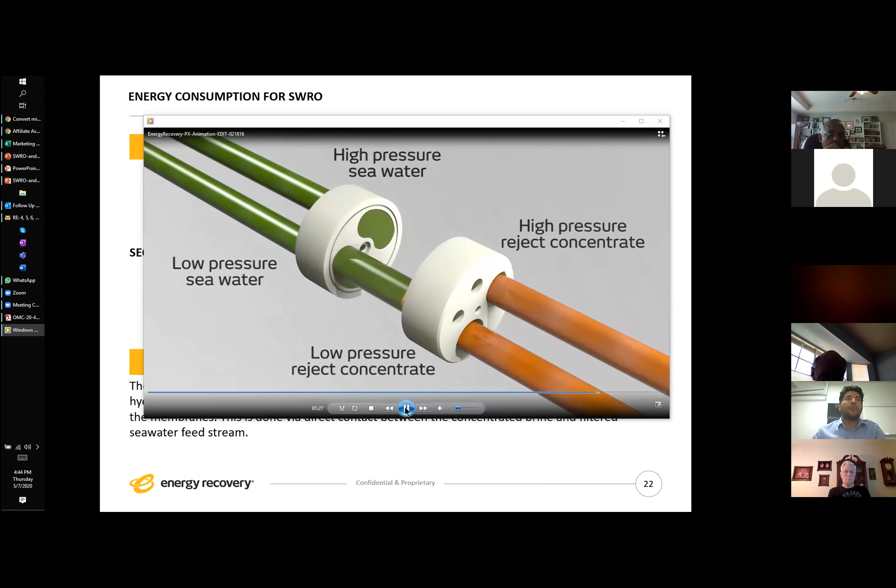Now it goes back into the system and joins the stream from the high pressure pump. Any remaining concentrate exits the rotor at low pressure and is then pushed out by fresh seawater. The rotor ducts function like a cartridge, charging and discharging as the pressure transfer process repeats itself. The rotor, using only the fluid flow, can spin up to an astounding 1,200 rotations per minute.

So basically that's a pressure exchanger. Now when we compare the three technologies, one of the main differences is efficiency. The isobaric pressure exchanger has a flat efficiency between 96 and 98% through all flow rates. The centrifugal devices like the turbocharger and Pelton wheel have lower efficiency at lower flow and higher efficiency at higher flow. However, keep in mind that 30-35% of the water cost is electricity, so efficiency is really important. We need to reduce electricity costs as much as possible. That's why it's recommended to always use a high efficiency energy recovery device to reduce the cost of the water.

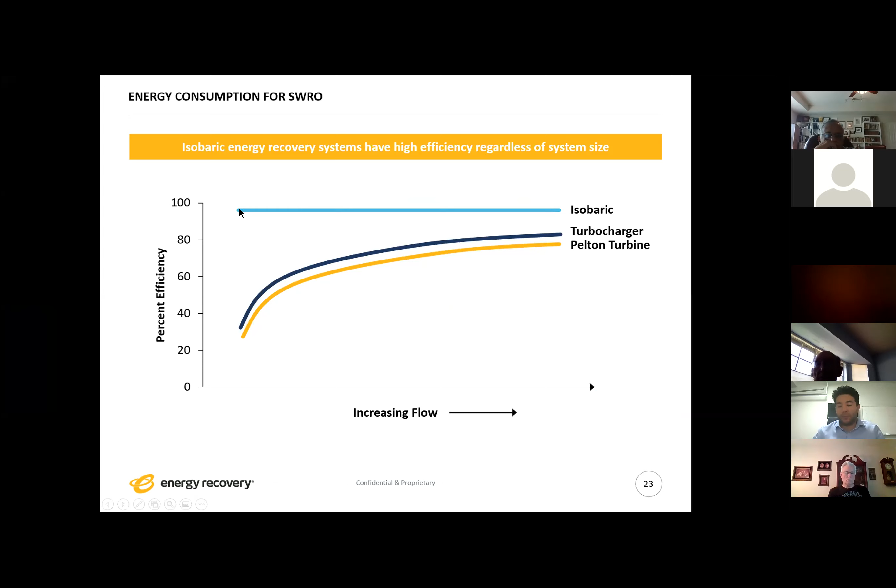It's using isobaric technology, PX devices. So the PX devices are offering the following advantages for the plant: savings of 116 million kilowatt hours per year.

Those 116 million kilowatt hours are equivalent to 82,107 metric tons per year of CO2 emissions, and equivalent to $12 million in electricity costs. So it's not only about saving energy and reducing costs, it's also about reducing the impact to the environment.

So these 82,107 metric tons of CO2 emissions are equivalent to 90 million pounds of coal, or equivalent to 200 million miles driven by a car. So you can see the big picture—it's not only about saving costs, it's also about reducing the impact to the environment.

So what will be the next level? The next level will be how can we keep reducing this impact. And one of the main options is to connect desalination with renewable energies.

So we can see here really quick analysis. First, a small scale solar seawater desalination plant, direct coupling. So you have an RO plant, it's going to be connected to solar panels, and it's going to give you enough electricity to produce water.

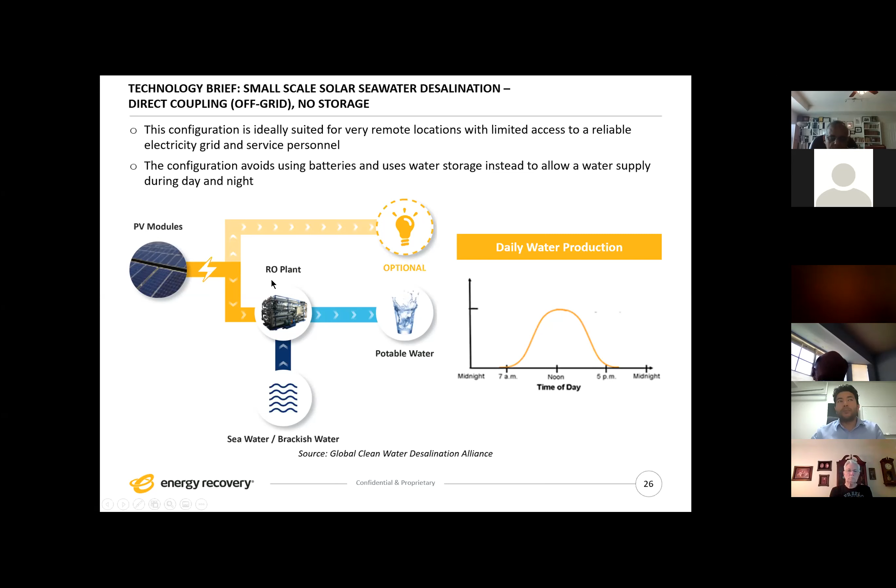Then the second option is, how can we go with renewable energies but operate 24 hours? We can combine solar power with wind power, plus storage of energy and a backup generator.

So the solar power is going to give you the electricity to operate between 7 a.m. and 5 p.m. In those 10 hours, the wind turbines are going to put energy into the storage batteries. And at 5 o'clock, we're going to switch power, going from solar power to the batteries in combination with the wind turbines.

And if at any moment the wind turbines or the solar panels are not giving you enough electricity, you will go back to the backup generator.

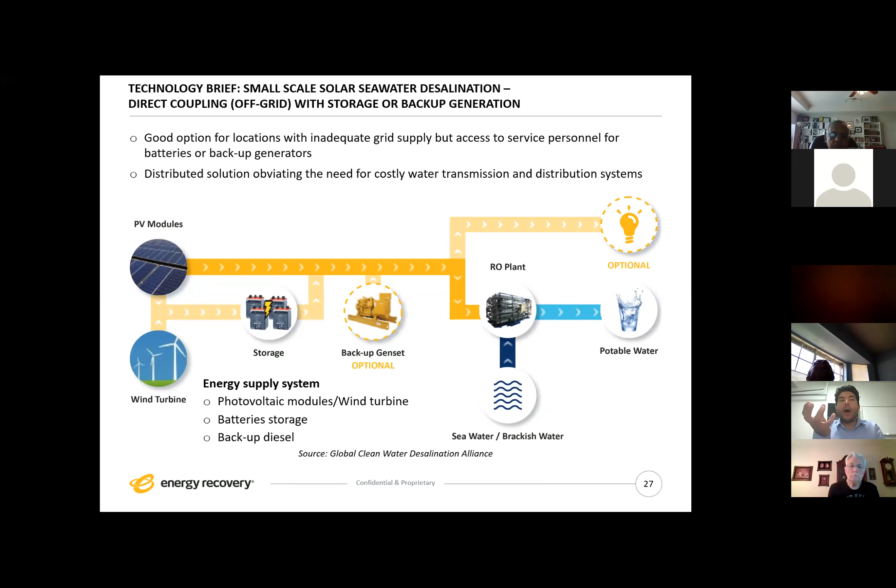And then we have one of the best solutions, if it's possible—if you are close to an electric grid, you can go to the electric grid. So what is the meaning of this? You have a renewable power plant that is going to connect to the electric grid, and at the same time your desalination plant can connect to the electric grid.

So here what we're going to do is offset the CO2 emissions. The renewable power plant doesn't have to be next to the desalination plant—it can be totally far away from each other, but they're going to be connected to the same electric grid.

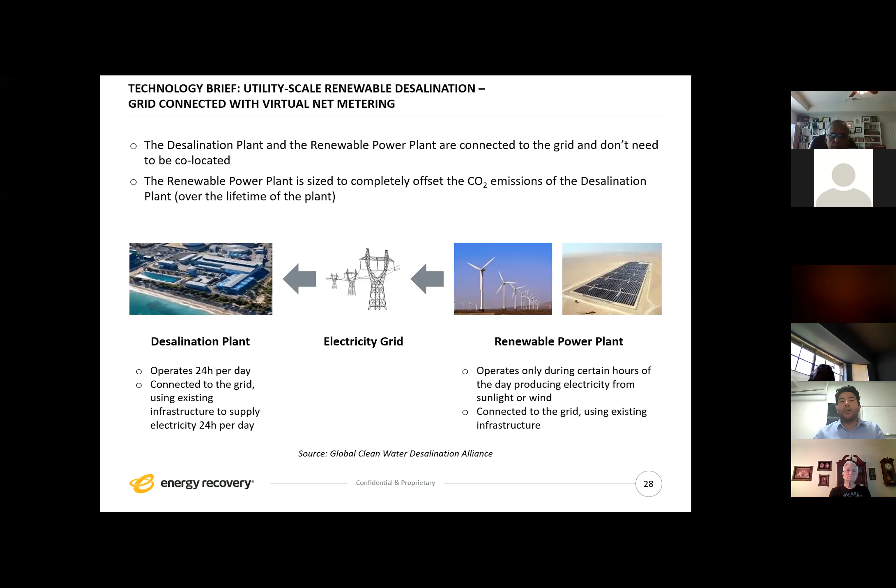And the goal is that if this plant is consuming 50 megawatts of energy, the renewable power plant is going to generate at least 50 megawatts, so it's going to offset one to the other. And we can see here some examples.

This is a medium scale wind power desalination plant in China. It's designed for 10,000 cubic meters per day, however right now it's running only at 5,000. It's located in Jiangsu province, China. It started operation in 2014. It has a capacity of 1.3 MGD. It's using wind power and only one turbine of 2.5 megawatts.

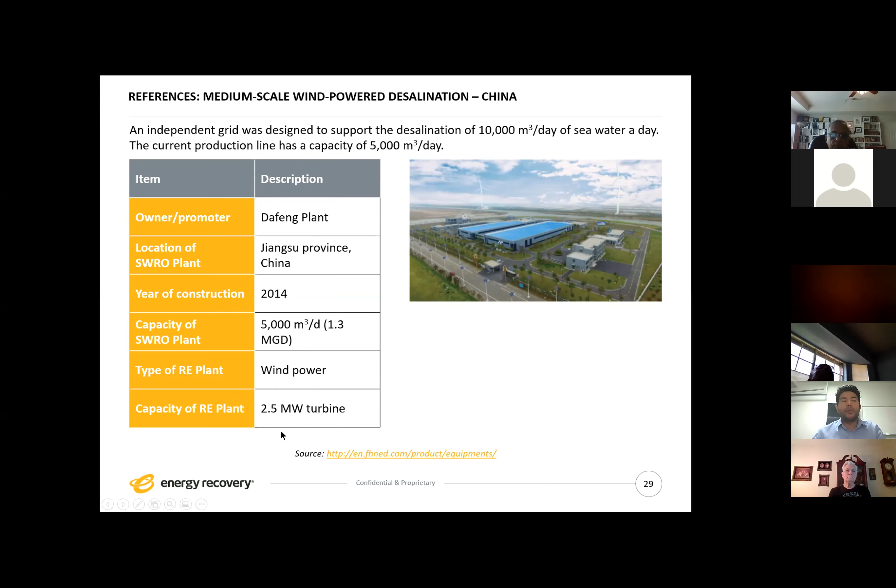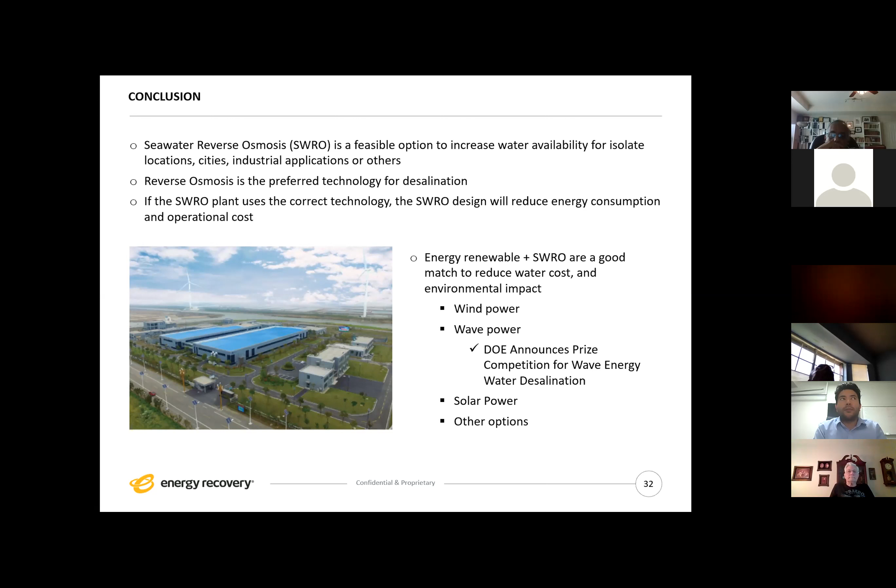Right now, per the analysis, we know that to produce 1 cubic meter of desalinated water, we require 3 kilowatt hours. One family of 4 persons in the USA requires more or less 400 gallons of water per day, which is equivalent to 1.5 cubic meters. So to produce water for a family of 4 for one day in the USA, you're going to need more or less 6 kilowatt hours of energy.

So the question is, what is 6 kilowatt hours of energy? We can put it here in context. It's equivalent to using a microwave oven for 4 hours, a TV plasma for 20 hours, or a space heater for 4 hours. So whoever is in north of the USA or Canada, every time there's a space heater running for 4 hours, that's equivalent to enough water for one family of 4 for one day.

A water heater, and more importantly, a 3 ton air conditioner. A 3 ton air conditioner is what you need for a house between 1,200 and 1,500 square feet. So for 1.3 hours that we're using an air conditioner in Houston, for example, that's equivalent to enough water for one family of 4 for one day.

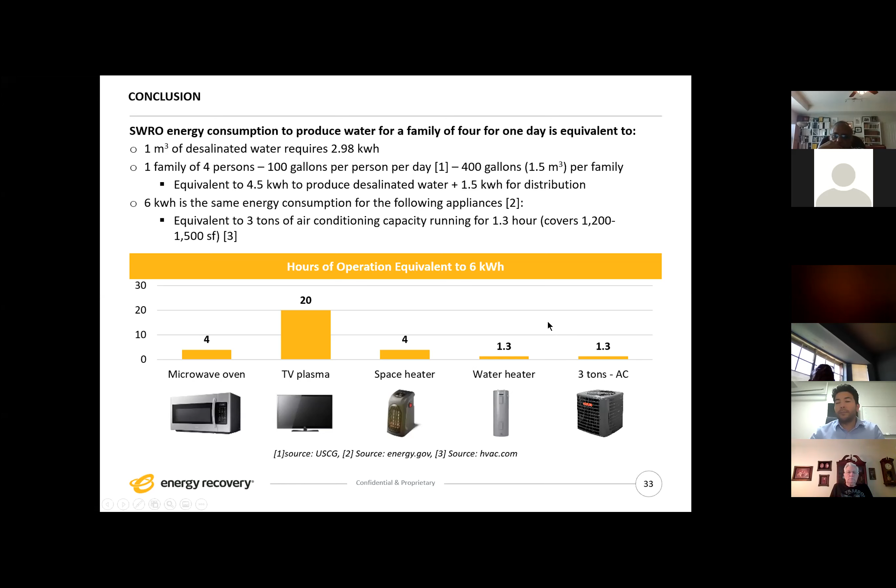So with this, please, do you have any questions?

We've had a couple of questions come in, and we'll take just these two and then wrap up. One question: can the pressure recovery exchanger be used on the Long Beach 2-stage RO process? Are you familiar with that one? No, I don't know that project specifically, we have several projects in California, but I don't know about that one.

Another question was about cross-contamination. It sounds like you potentially mix your incoming and outgoing streams in your device. Doesn't that create problems? It's a good question. There is a mixing between the concentrate water and the feed water. This mixing is equivalent to 5% volumetric mixing, which is equivalent to increasing your membrane feed pressure by 15 psi. So when designing the pressure exchanger, you have two options: you can add a piston in the middle, or you remove the piston. By removing the piston, you don't require any maintenance, but you increase the feed pressure from 1,000 psi to 1,015 psi. So from the design point of view, extra 15 psi of pressure is a good price to pay for no maintenance. Yes, we have mixing, but for this specific application, it's not an issue.